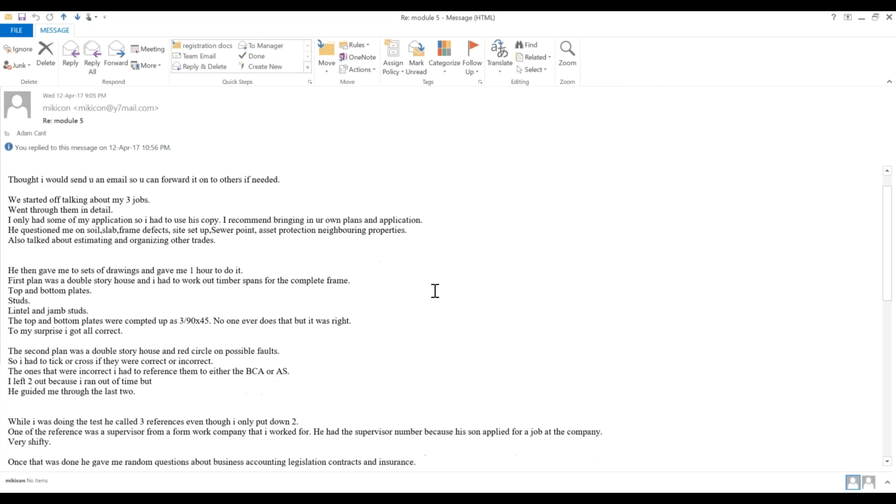And he said the second one, the plan he had was a double-storey house, and there was basically a red circle with possible faults. And then he had to access the building code and the standards to actually say whether they were faults or not.

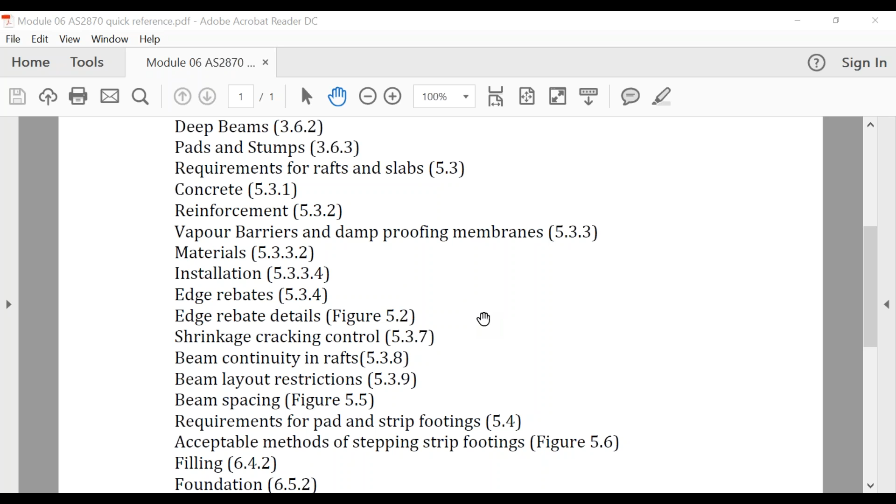And so we'll go through to around, you know, sort of 7:15, 7:30, have a bit of a break. And for those guys who have actually done this before, when we set the activities, what I'll do is just change basically what the soil classification is. So if the original one in your book was, say, a class M, we might then change it to a class P just to try and change it up a little bit for you guys so you can still be involved in it as well.

Let's get rid of that. I'll just make this fractionally smaller. 1 second. All right, so if you've got the same versions as me, which I'm sure you all do, it's on page 17. I've gone way too far. Got to be keen.

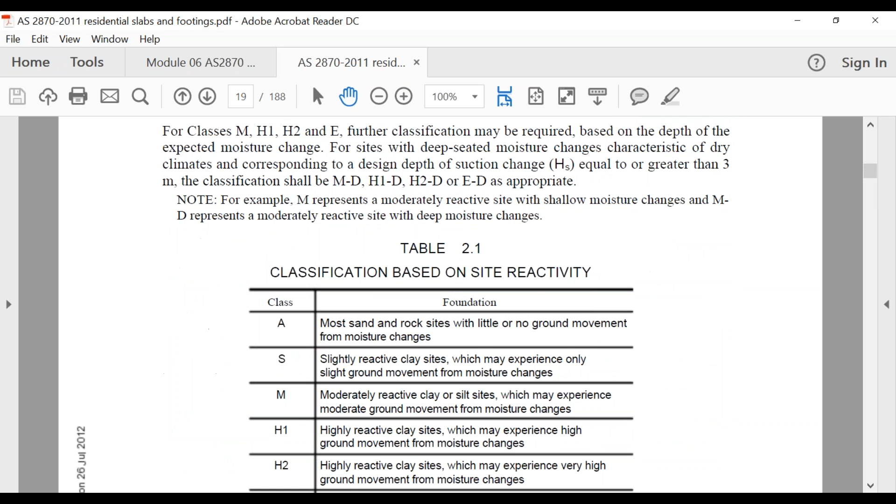All right, so this here, I might shrink that a little bit more. So this here, as you can see, it says site classification based on site reactivity.

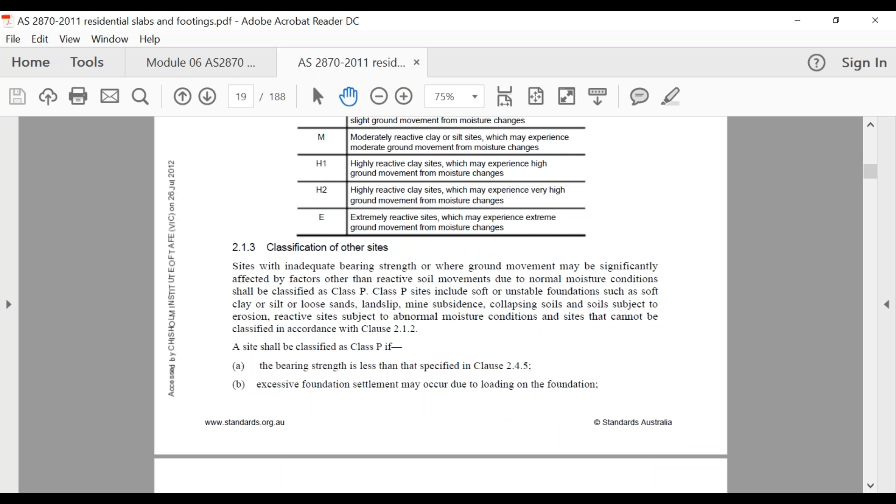So basically, if it's not going to meet those requirements, that's when it's going to become a Class P. So that's just a little bit of background on what our soil classifications are. And now when we do this, guys, it's really tonight's subject.

A lot of the answers you can find in the Building Code of Australia, or you can actually find them in Australian Standard 2870. So it's really up to you, whatever works for you. Me personally, I just use the BCA because I use it for basically all sorts of stuff, and rather than be carrying all these different standards around, I've just found that that's something I used over the years, and I probably didn't own that many Australian standards because they were so bloody expensive. So I just got used to using the Building Code of Australia.

But in saying that, the section in the Building Code of Australia to do with our slabs and footings obviously isn't as comprehensive as the Australian Standard 2870. So the downside is, for me, I go to the Building Code straight away, or you guys might call it the NCC, and I look there first. And then sometimes it doesn't always have it, so then I've got to go and filter through the Australian Standard 2870. So it's really up to you, whichever's going to work for you.

So you might see me tonight referencing basically the building code, and you might go, I actually found that in Australian 2870. It doesn't matter as long as you're finding the answer, because it's going to be the same answer in either. So whatever works for you, and you can navigate through quickly to find your answers, just use whatever is best suiting your needs.

All right, so another thing which I'll just show you, I won't go through it tonight just because of the time restrictions, but I'll email this out as well. What they've done with the online version is given me a few extra training aids that you wouldn't have seen in your classroom. So one second, and I'll just bring this up, and it's just a bit of a definition on all the different footing systems that we use.

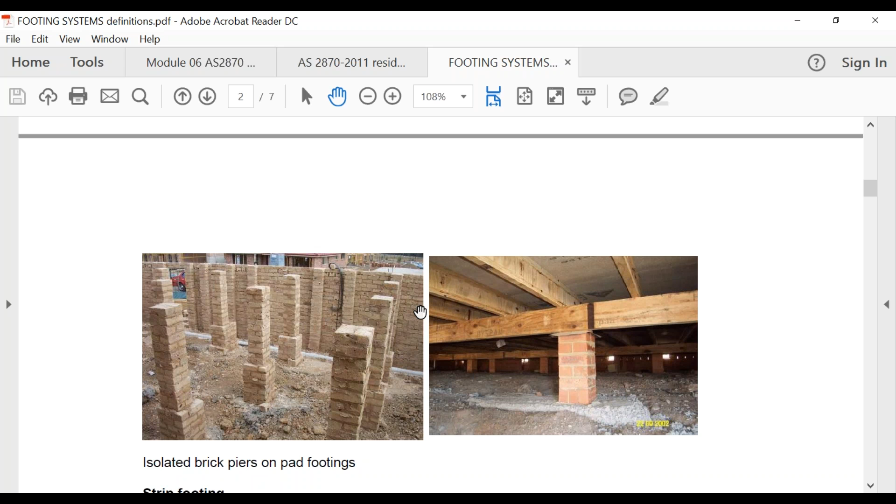And then it goes on to a little bit about our pad footings, and says they're also called blob footings. It talks about when we would actually use those. And then it gives us a picture showing us what isolated piers and our pad footings are. So next week, when we do our subfloors, and we see that we're doing stuff on piers and we're talking about our subfloor ventilation, then this is what we'll be looking at here.

And then it talks a little bit about our strip footing. It's the same thing. It talks to us about what it is and what the process is. So if you've never done a strip footing before, it says we dig the trench with a backhoe or by hand. I'd hate to be digging it by hand, but if you're down the side of a house and you can't get a backhoe in, maybe you do dig it by hand. Then we tie up a reinforcing cage, lay the reinforcing in the trench, and then make sure it's got the adequate cover for our concrete around it.

And then it talks about in there what our cover should be. So if you're not familiar with what cover is, guys, it's the amount of concrete basically surrounding our reinforcing before it either touches the ground or the black plastic membrane that we've got in there.

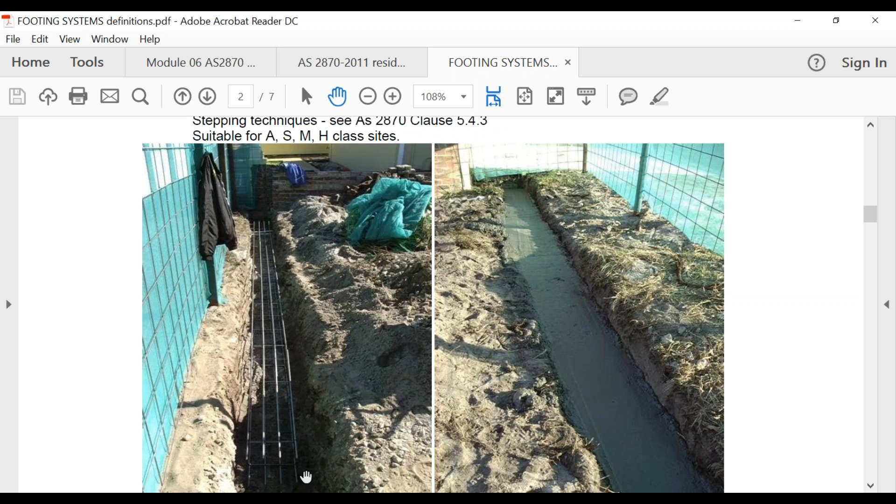So it gives us a couple of pictures. It shows you, yep, they've got what looks like a cage in there. It's not just a layer of trench mesh. They've actually made up a cage with ligatures, I think. Then they've basically poured it afterwards, and as you'll see, they never finish at ground level. It's got to have basically a measurement from ground level down, and we'll cover that tonight when we use our standard. So it does a little bit in there basically on our strip footings.

Then it talks here about our pier and beam construction, and basically shows how that works, and then our pile and beam. And then it talks about our slab on ground. Sorry, it talks about raft slab there as well. Slab on ground, and talks about our footing slabs. And you might find that this terminology might differ slightly to what's in the standards, but by reading it, you'll understand it. And there's our stiffened raft, which we'll be covering a lot tonight. That seems to be pretty big on what they're testing in the VBA at the moment.

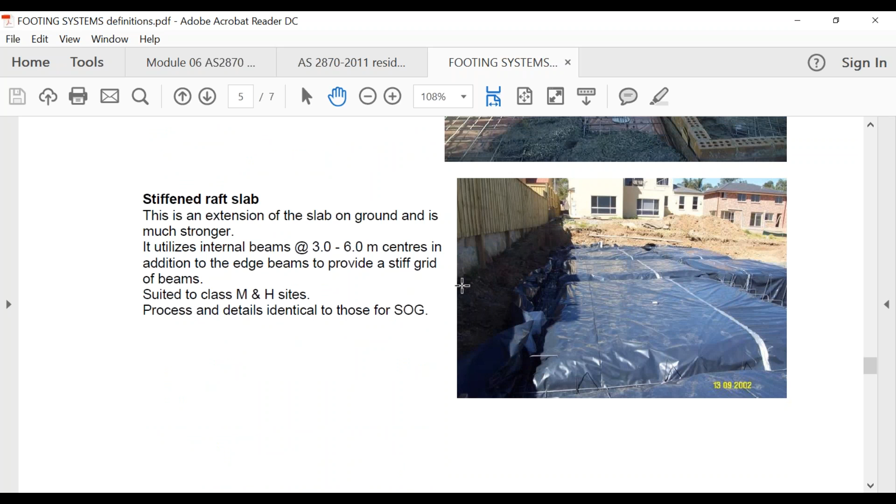And it gives us a little bit of a picture there on how the grid system works on that. And then obviously our waffle raft, and it's showing it there. So what I'll do, guys, I'll email that over to you. You might go, hey, I'm all over slabs. So as I said, anything I send over, if it's not for you, just delete it. But I'm someone who thinks it's better to have too much information than not enough. So I will forward that over. I just thought I'd explain it to you before I send it over.

What's this? I've never seen this before.

All right, so what we might do, guys, just to get us started, is when we look at our Australian standards, the first 3 things that I tab are the page for our stiffened raft, for our waffle raft, and then also for our strip footings, because they're basically the 3 different types of slabs and footings we're going to be questioned on when we go into the VBA. So if you've got your Australian standard there, the stiffened raft starts on page 29.

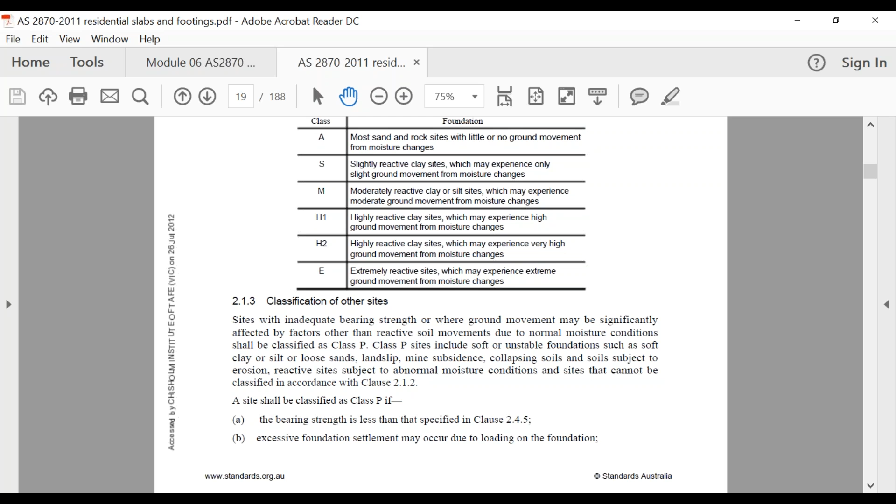So let me come down a bit here. So there's our stiffened raft. That's basically where a stiffened raft starts. So if you haven't actually got a tab on there, I'd chuck one on there as your stiffened raft tab. Then the other one we're going to have is our waffle raft, and it starts on page 33, which is this section here. So if you haven't got one already, just chuck a tab on the side of your book that says waffle rafts.

And you'll see that whenever we go to any of these sections, it'll always give us a bit of a definition, which is highlighted here, and we'll talk about these a little bit more later on. And then it'll give us a table on how we work out what our reinforcing needs to be, what our alternatives are for bars, what the depth of our footing is, and then what mesh we're going to use. So you'll find that they work in their own chapter. So when we go to that last part that said our stiffened raft, it'll give us an explanation, some drawings, then a table. And when we move on to our waffle raft, the same thing again.

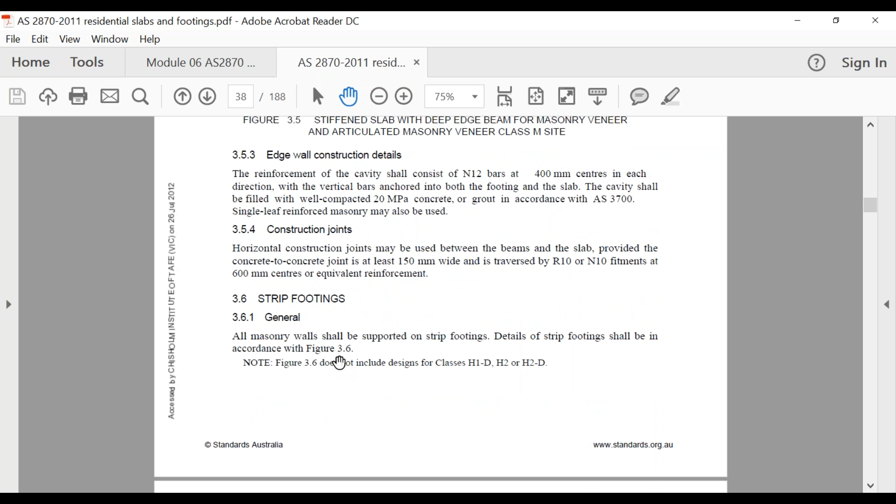And then the next one that we want to put a tab on is our strip footings. So strip footing starts at the bottom of page 36. I'll just scroll down. It's just here. So it basically talks about our strip footings on the bottom of page 36. So if I was you guys, chuck a tab there.

And then once we come over, there'll be some pictures explaining, and we'll cover this stuff a little bit later on. And then we'll come down, there's our spacing of our beams. And then there's our table where we work out with our soil classification and what type of construction we're using, what our depth and width is, and then our reinforcing. And so I would just tab all those ones there to start with.

And from there, what I like to do is just do a little bit on our stiffened raft slab, because that's the one we seem to get tested on the most. We'll do a couple on that tonight, guys. So the first drawing that we want to pull up, bear with me 1 second and I will just bring it up, is this one here. So I'll just get rid of this for you. We'll do this anyway, because it says trainer to give the specific detail.

So what I've done, guys, is actually just made it for a Class S site. So if you guys basically want to work out that drawing there to a Class S with articulated masonry veneer, and we'll say that the slab length is basically 22 meters. So therefore you can then determine what fabric mesh we've got to put in there, and we should hopefully be able to detail that.

So if you go to your Australian standards, we should be able to work out, from the table, what the depth of our footing is. We can draw in where our trench mesh goes, and how thick this has got to be. These two walls, guys, whilst it doesn't show it, are load-bearing walls. So what's the distance from that load-bearing wall to the center of our internal beam, and then our slab thickening, how wide that's got to be, and how deep it's got to be. So fill in that detail.

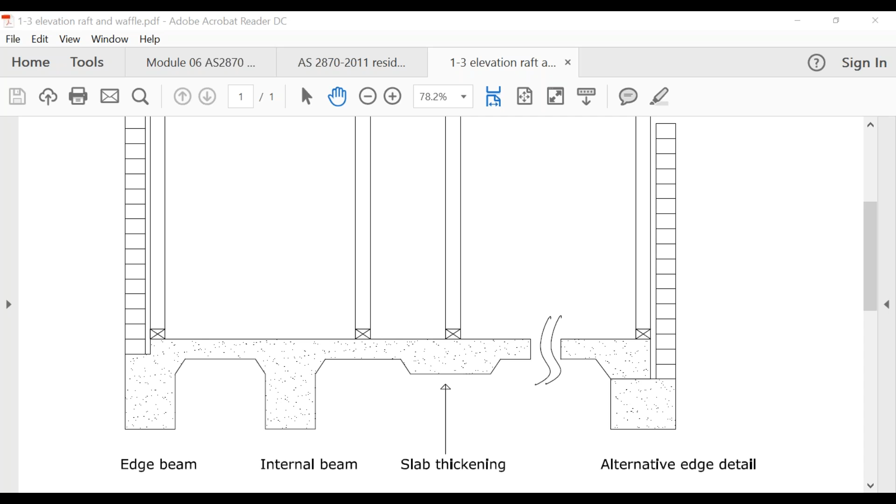So what we're doing, Jeff, is we're just doing this one here on the raft slab, and I've just given the guys a scenario that it's a Class S site. It's got articulated masonry veneer, and the slab length is 22 metres. So from there, we're just going to detail it, give us the depth and the width of our beams, the spacing, and these load-bearing walls, how far that is. So you just detail that as if it was an assessment based on a Class S with articulated masonry veneer.

Give me a second, Greg, and I'll get to that one. I actually got your email today too, Greg, and I just hadn't had a chance. I'll tonight send over some stuff that I've got. I don't know how new it is though, but I'll send it to you. And if you've seen it before, by all means, that's all I've got really. But hopefully it might be new to you.

Yeah, so with that load-bearing wall, it can't be any further than 1 metre away from the internal beam. Yeah, so it's reading the question. So basically if it's any further than 1 metre away, that's when we have the slab thickening underneath it. Or are you asking me, is that the minimum or is it the maximum? Sorry, that's what you're asking me, aren't you? Okay, I'll have a look at the picture.

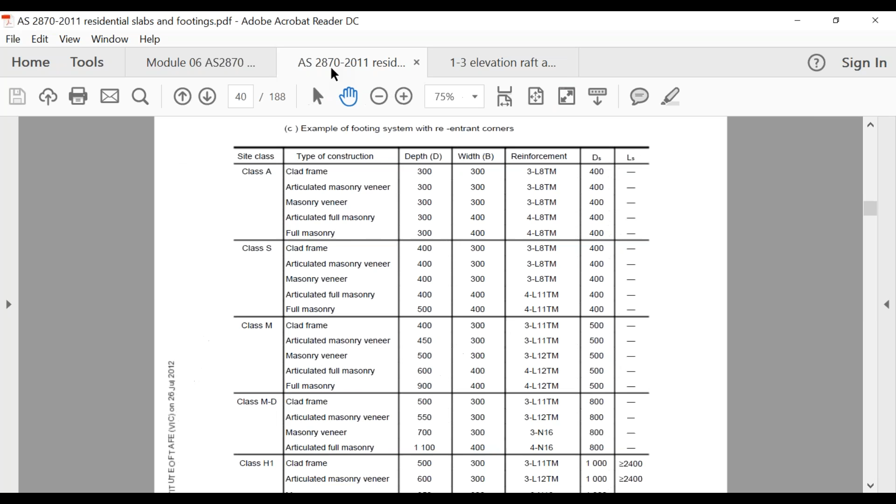So what we should be doing, guys, I might just bring up the standard, just so if anyone is struggling, because there might be some guys doing this for the first time. So let me get up to the page that it's on. Just give me a second. Okay. All right, so as we can see here, this is a drawing that we want to be getting out of our Australian standard.

If you're wondering how we got here, basically what we should be doing is going to the stiffened raft section of our Australian standard, which starts here in section 3.2. When we come down, there's some things that just don't change. So there's basically the width of our footing here, that angle on there, and that's something you'll probably see in a multiple choice, and it says what is the maximum or minimum, I forget how they word it.

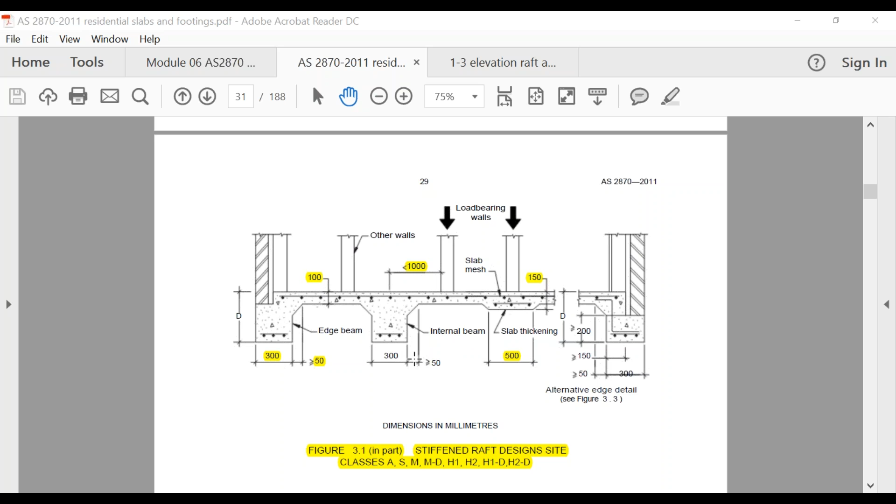I got the trench mesh there as 3L11TM. So let's have a look. I've been known to make mistakes, especially when I make up something off the cuff. So what we said it was going to be, on its articulated masonry, I said, didn't I? So that would make it that one there, wouldn't it? So the 3L8 TM. Does that sound right? I did say articulated on a class S, didn't I? Yep, cool. So there you go. That's right. All right, cool. So everyone's going, I got that wrong, but actually I got it right.

So there we go. All right, so what we'll do from that one there, guys, is we'll do another one. I like to sort of keep these, we'll do all stiffened rafts, then we'll do waffle pods, and then we'll do strip footings. And then at the end, we'll go through basically the questions. So whilst we've just done a little bit there on our stiffened raft slab, what I'd like to do then is basically I'll bring up this other document. So just bear with me 1 second.

All right, so this one here, some of you guys, if you've done this course before, you would have already done this one, but I've actually done this up as another exercise as well, but I'll just talk through it basically to start off with. And so we're going to do this on a Class M articulated masonry veneer. And so what we need to do is draw in our reentrant bars. So guys, if you're not sure what reentrant bars are, basically at our internal corners, I don't know if you guys can see my mouse, but you can see the internal corner here. Basically we have to put a reentrant bar in there.

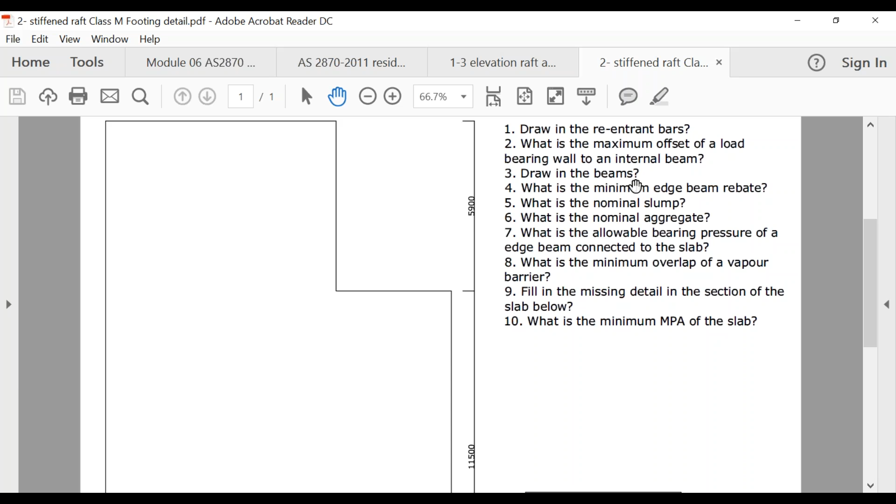We can either find that in our Australian standard or in our building code, and basically it tells us what size that needs to be. So let's draw in where it goes and then also nominate what the size needs to be. And then looking at our last drawing, this is what is the maximum offset of a load-bearing wall to an internal beam. So we can write that in there. And then we're going to draw in what our beams are. So with our beams, guys, basically when we reference our table, it's going to tell us what our spacing of our beams should be.

And so it is actually in our Australian standard, and we'll do a little bit more when we talk about our continuity of beams and so on. But I just use this lesson, I suppose, where I don't want you to feel like if you're doing it for the first time that you're totally left and you're lost. If you're lost, I'll put you in the right direction. But I think it's a good way to start, rather than me putting everything on the screen, to point you to the direction and say, this is all going to be in our stiffened raft, and you read through those, and there might be a reference where it'll point you to the back of the book under a certain clause to talk about continuity of beams and things like that.

So if we look in our stiffened raft section of our standard, we should find a lot of this. The generic stuff, basically around what is a nominal slump of concrete, the nominal aggregate, that will be in our standard and also in our building code. So it won't necessarily be under the stiffened raft because that is generic to all our slabs and footings. And then the same with our bearing pressure and our vapor barrier.

So let's just have a bit of a crack at it. And as I said, if it is your first time doing it and you're totally stuck, just say, hey Adam, can you give me a hand with this? And I'll put it on the screen and show you how we get there. But basically, the starting point for the reentrant bars, yeah, that'll come under your reinforcing.

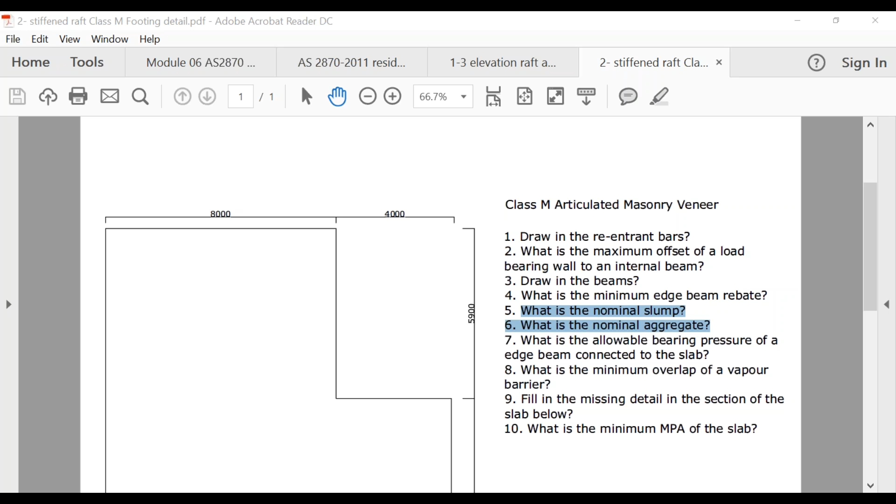And when you do it, guys, don't forget to do the little sectional down here as well. You can draw that in with your trench mesh, basically how deep it is. Maybe put in your membrane, how much cover needs to be on there with your mesh.

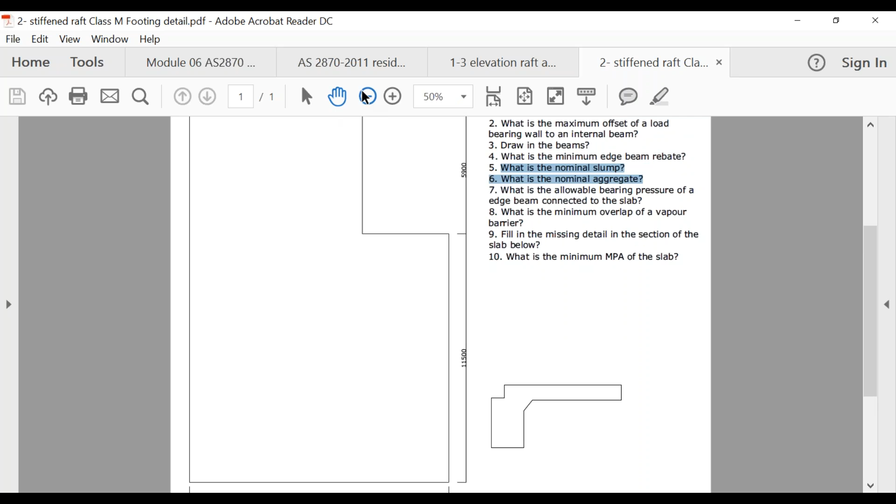Make that a little bit smaller. Oh, it's way too small, isn't it? Cool.

Okay, that's all right, Valavan. I might start taking you through it now while the other guys are working through it, and I can basically start to take you through how we actually did this, if you like. Are you happy with that? Yep, and don't feel bad about this not being your strong point, because to be honest with you, I would dare say that probably not many of the guys in here, this is their strong point.

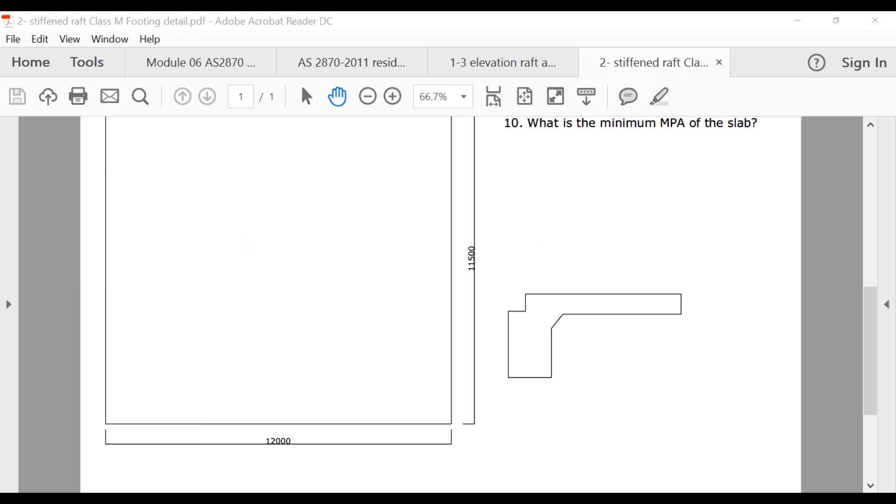So back to here, the first question we've got says draw in the reentrant bars. One second, I'll just pull open my building code, and then I can show you what we're looking at. So on the building code here, it says draw in the reentrant bars. Now this will be in your Australian standard as well. I said I'm just used to using my building code.

But if I come down to page 142, let's make this fractionally bigger so we can all see it. So this here is giving us our stiffened raft as well. So you can see that it's got pretty much the same table in our building code. So let me come back up.

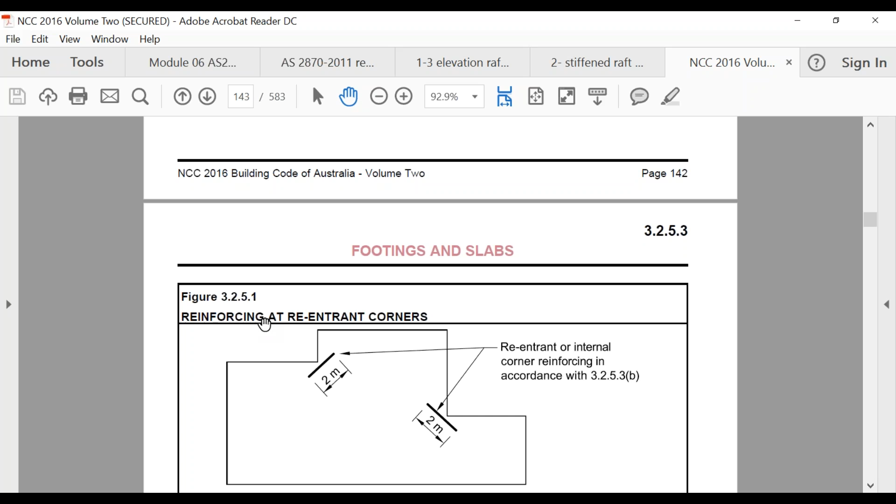So this here is talking, which section I'm going to of the building code, basically it's in our footings and slabs part. And when we come down, there's a picture here that says reinforcing at reentrant corners. So that's what we're getting at there. You see how there's internal corners. We have to put reinforcing on those corners, and that's called a reentrant corner.

So it tells us that basically it has to be 2 meters long, and it says it has to be in accordance with 3.2.5.3. So if we go back up, 5.3, this is where it'll talk about it. So at a reentrant or internal corner, 2 strips, a minimum of 2 meter length of 3 L8 trench mesh, or 1 strip of 3 L11 trench mesh, must be placed diagonally across the corner.

So that tells us what type of bar. So it's got to be 2 meters long, and if we use basically the three bars at 11 millimeters thick in the trench mesh, that's what we're going to place across those reentrant corners.

So that's basically, one sec, I'll just bring up the picture again. Oh, 1 second, mate, it's just died. I'm going to have to bring that one back up.

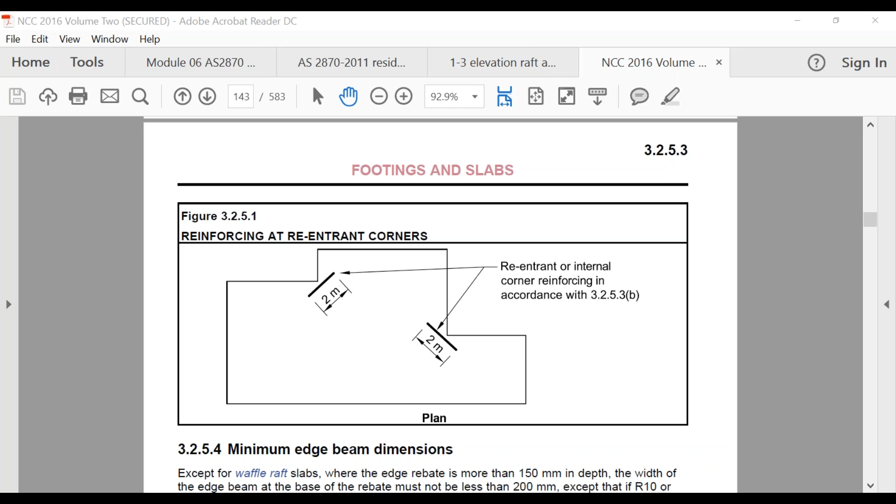So that is the first answer for the reentrant bars. So then the next question says, what is the maximum offset of a load-bearing wall to an internal beam? So is it? Yeah, it is, mate. It's always 2 meters. It can be longer, but remember, this is always going to be the minimum. So if you had a bit lying around and it was 2.5 meters, you probably wouldn't bother cutting it off. Just save your time. You just chuck it in and you tie it off.

So just remember, everything we're doing with the standards is always going to be the minimum, and we'll see that more in the coming weeks when we start designing wall frames and so on. And you'll look at it and go, geez, I wouldn't use a timber that small, and it's because this is a minimum, and we always go that little bit extra.

So if you had a bit that was longer than 2 meters, you just put that in, unless you could cut it in half and use it somewhere else. But if it's only got a few hundred mil that can't be used anywhere else, you would throw it in there anyway.

Sorry, 1 second, I've got a question there from Ben. Yeah, so if you want to maybe just wait on that one, Ben, when I get to explaining that one to Valavan, I'll cover that one when I get there. So if you just leave that one, I'll go through those as we get down there.

So I'll go back to the Australian standard. Bear with me just a minute. When it was talking here about our beams, and it said to go to sections 5.3.8 and 5.3.9, it starts to talk about how our beams have got to be continuous all the way through. So we'll have a read on that section. 5.3.8, I'll just find the page. So it's on page 50.

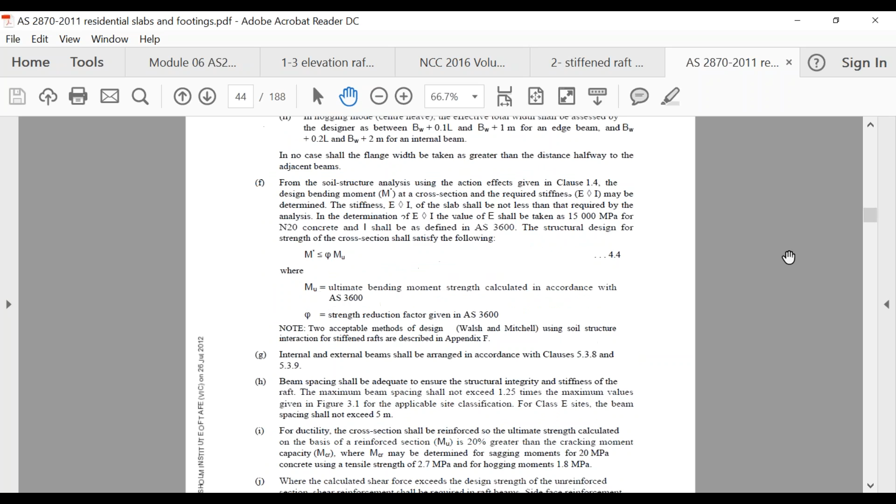Okay, bear with me one second, Ben. You might be right. I might have been going off my other plan. I've got about three different plans here to help the guys with. I've probably just gone to the wrong page, because I was looking at the wrong soil classification. So I'll just keep going with this part here. Oh, what's going on? My standards are missing a few pages. Nearly there.

Right, so beam continuity in rafts. Where the raft design includes internal beams, which ours does, the structural continuity of internal and external beams in stiffened rafts, including our waffle rafts, shall be maintained with the following criteria. Internal beams shall be continuous from edge to edge, so they've got to go from side to side. Where beams are at different levels, as may occur in a two-pour system, we don't have to worry about that, but they've got to be continuous because we're not doing a two-pour system with this.

And where one side of the re-entrant corner is less, yeah, so don't worry about that one, that doesn't apply to this one here either, but it talks about, you know, if it's less than 1.5 meters and so on. So what we got out of reading that was that when we put our beams, they've basically got to go all the way through like this.

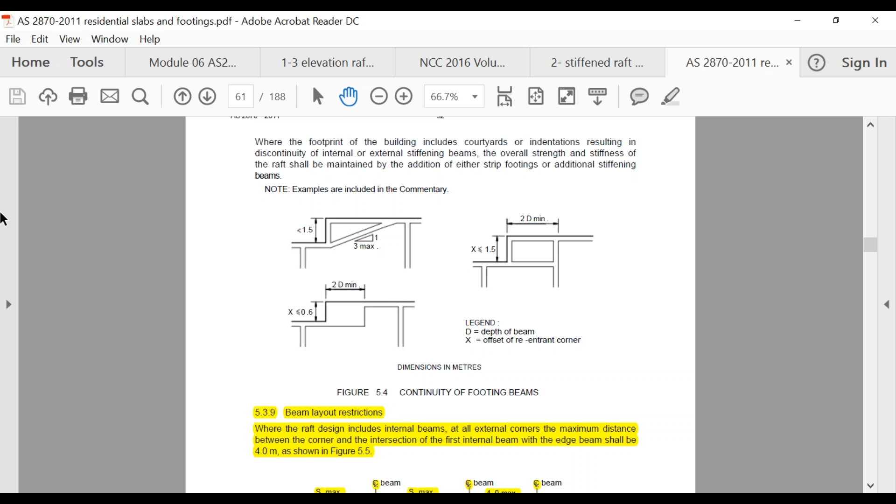So bear with me a second, and I'll go back to basically our question. Sorry guys, just got that many tabs opened up here at the moment, trying to have all these things done.

Yeah, sorry, and one other thing too, this is what Ben just brought up, with those internal beams, when you see on here, it talks about the beam layout restrictions. So when I covered the raft slabs earlier on, and it said your beam set out as per clause 5.3.8 and 5.3.9, you'll see here that the first one in, it says where the raft design includes internal beams at all external corners, the maximum distance between the corner and the intersection of the first beam with the edge beam shall be 4 meters.

So as you can see here, the first one in is always going to be 4 meters, and then that table that I showed you before, where it had our beam spacing at 6 meters, from then on becomes 6 meters. So the first one here is always going to be no further than 4 meters in both directions. Can you see that there? It's got 4 meters that way, then 4 meters this way. So that's why our first one's always 4 meters, and then after that we can make it up to whatever that table has. And I'm pretty sure that on the one we looked at it was 6 meters.

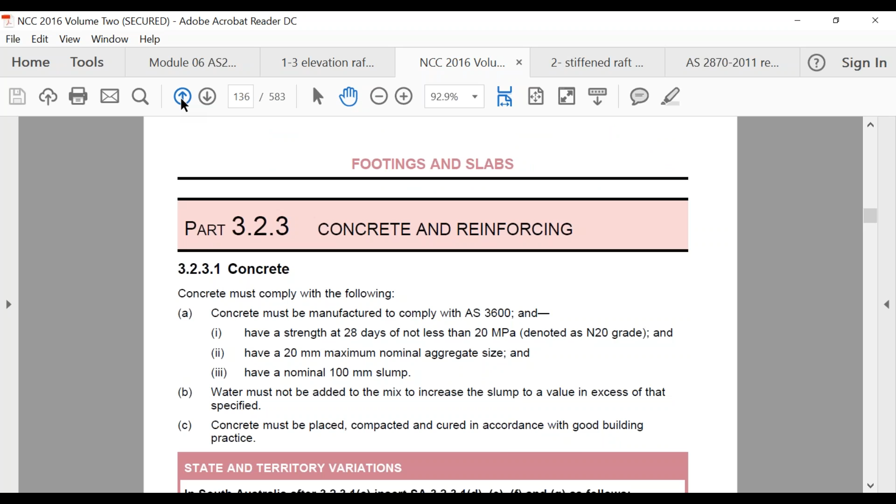I hate using a soft copy. Here we go. So this talks about our edge rebate. So for you guys too, I presume you're listening in if you're still doing your drawing. So the minimum edge rebate, if you haven't got this one, guys, basically the edge rebate must not be less than 20 millimeters, except as provided for in D.

So when you look at D, basically they're not required for single leaf masonry. Normally the question I get asked there is basically 15 millimeters. And another one which we quite often get in our multiple choice is how much can the brick actually overhang the edge of the slab, and that's 15 millimeters. Not something that's asked in that question we were just doing, but definitely worth highlighting and tabbing for your multiple choice. I've just got that called my edge rebates. That's what I've got the tab on my book.

All right, so we'll go through this next one. This is the same thing, can be out of the building code or out of your standard. So it says, what is a nominal slump? I'll cover a little bit later, guys, if you don't know what slump is. If you can hang around, I've got a video on it that I can show you at the end if you're not sure how they actually do slump. But I won't do that now because probably a lot of you guys do slump tests already anyway. So what is a nominal slump of concrete?

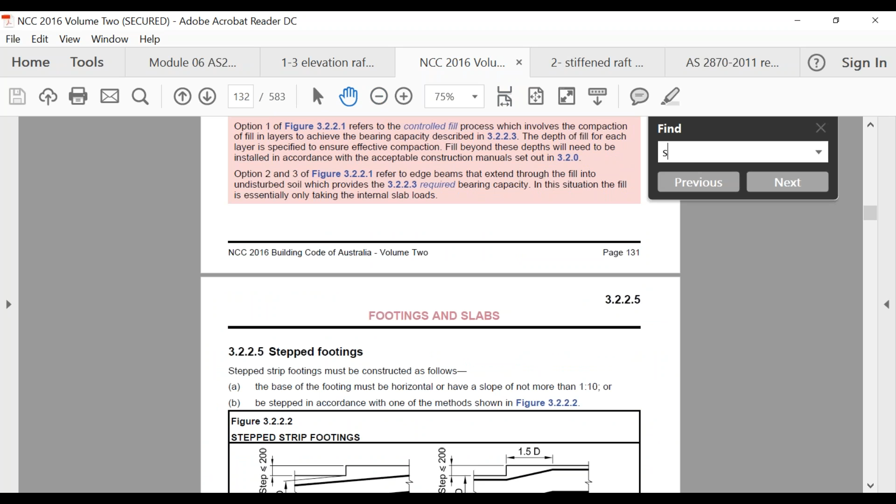So I go to my building code for that, and just let me find it. I'm just going to shrink this a bit. Actually, what I'll do to cheat and get there quicker: if you're doing a soft copy, guys, if you go Control F, you'll see this pop down, and that's in any PDF. I'm just going to put slump in there. Save me scrolling through and making you guys all giddy. And it'll show me where slump is in the building code. So there it is, section 3.2.3.

And this is where it talks about the next couple of questions we're going to be asked. So the minimum nominal slump is 100 millimeters. The minimum MPa is 20 MPa. And the maximum nominal aggregate is 20 millimeters. So that's where you can find it, in concrete and reinforcing. A lot of you guys doing your multiple choice might know these off the top of your head anyway. But if you don't, it's worth chucking a tab in your building code and highlighting those, because that's something you'll more than likely get in a multiple choice as well.

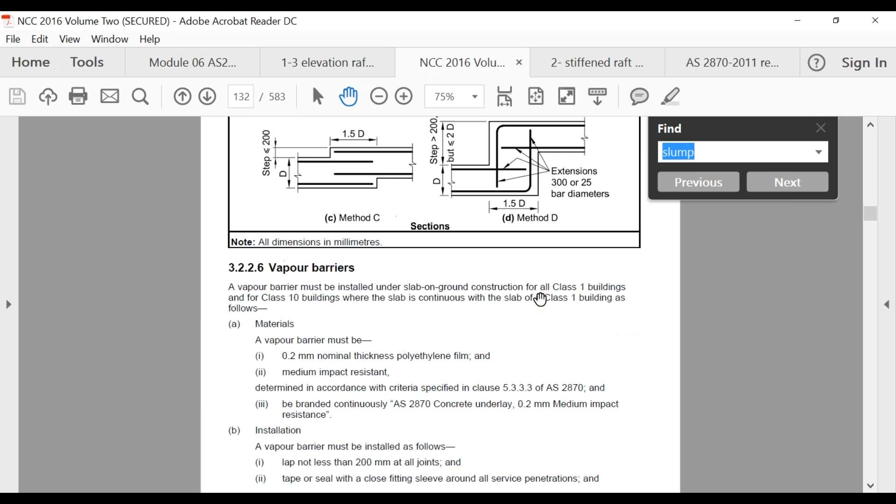So that one covers our nominal slump and the aggregate. Next one's a little bit trickier, and it talks about what is the allowable bearing pressure of an edge beam connected to the slab. Same thing again, this is going to be in your building code and in your Australian standards. I've got it marked in my Australian standards because this section is a little bit smaller, I find them easier to find. I've got it marked here on page 130. I'll show you something that I would highlight and tab. Bear with me a second.

The worst part is because I'm using the soft copy, I haven't got all my highlighted parts on it. But you can see here, foundations for footings and slabs. If you're wondering, hey Adam, how did you find that? The section we're going to says preparation under excavation for footings, then it scrolls on and starts to talk about foundations for footings and slabs. This is where it tells us our different kPa. Slab panels, load support panels and internal beams must have a bearing pressure of not less than 50 kPa. Edge beams connected to the slab, not less than 50 kPa.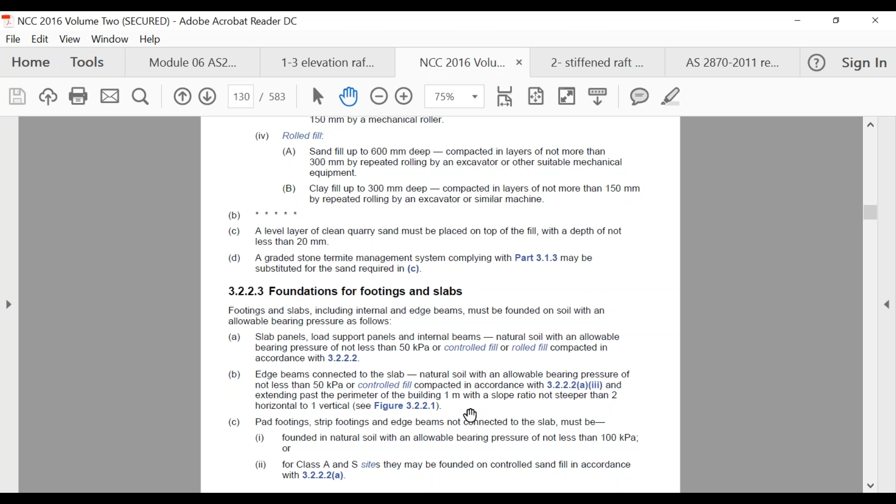And there's another one here where it talks about 100 kPa. Pad footings, strip footings and edge beams not connected to the slab must be on natural soil of not less than 100 kPa. So there's a couple of your measurements in kPa if you wanted to highlight those. And that was the answer for number 7. The actual answer was 50 kPa, the first one I showed you: what is the allowable bearing pressure of an edge beam connected to the slab?

And then these next ones, what is the minimum overlap of vapor barrier? So the vapor barrier, guys, is obviously our black plastic, and it's going to be in the same section of our building code here. So I scroll down a little bit. It'll also be in your Australian standard, but you can see here's a section, still in our preparation part, talking about vapor barriers, and it talks about how thick it has to be.

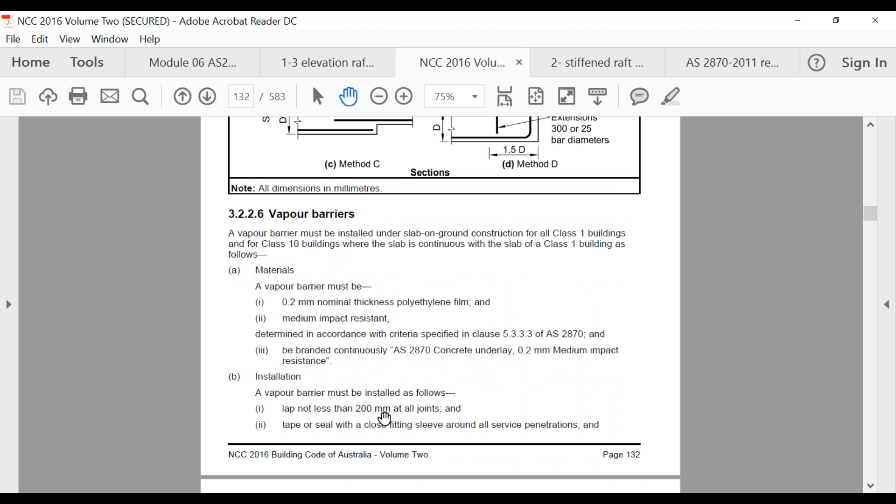So it's got to be 0.2 millimeters thick, medium impact resistance, so obviously we're not piercing it when we're walking on it and there's rocks underneath it. And then it talks about the installation, and it states that it has to be lapped no less than 200 millimeters at all the joints, and then also goes on to talk about, not that it's part of this question, but just for your own knowledge, how we actually have to manage that vapor barrier around our penetrations.

So it's got to be taped or sealed with a close fitting sleeve around all service penetrations, and then fully sealed where punctured, unless for service penetrations, with additional polyethylene film and tape. And you can read more on that, but the main thing that you guys are going to be asked in your multiple choice is the 200mm lap on that black plastic. So nearly through these questions.

Basically, we did cover there what is the minimum MPa of a slab, and we found that was 20 MPa. So MPa, guys, stands for megapascal, and that's how they actually test the strength of your concrete. If you're working commercial, you might have seen it. They do a cylinder test where they take the concrete away in this big cylinder, probably a bit bigger than a Coke can, and then actually crush it.

If you're interested in this stuff too, guys, I've got videos on it from other training courses I do. Most people don't really care. They just want to know that it's got to be 20 MPa. But they take it away, and concrete keeps getting harder the longer it goes. There's some charts in this video I've got that show you, even in a couple of years' time, how it still increases in strength. They crush it and make sure it's at the strength it should be at the time of the crushing. And then the last part here was fill in the missing detail of the section below.

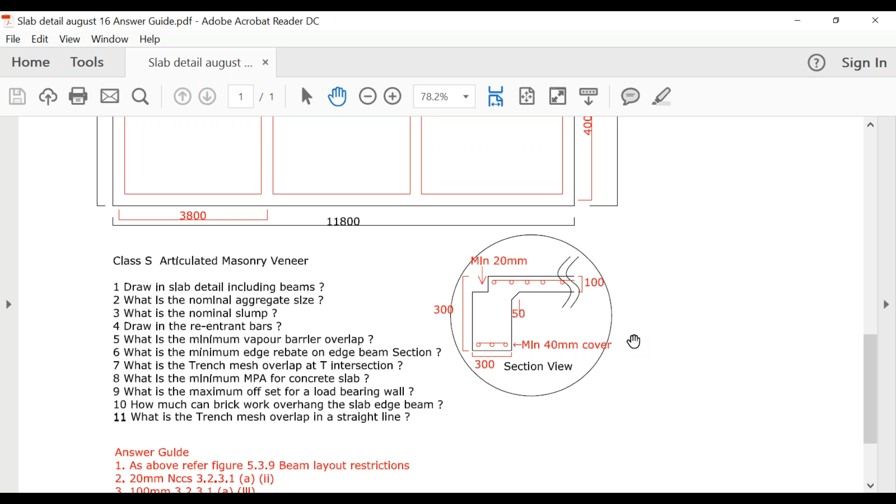Yeah, cool. So basically our cover, and then that transition in there was basically 50mm. That's what you really want to be drawing in there, something that looks like that, and obviously suits your scenario. So as I said, I might just cover off that continuity of beams again. Now, unfortunately, this is only the CAD drawing that I've got.

But when we go to our Australian standards, and this is something that you definitely want to tab within your Australian standard, are these two sections here where it talks about the continuity of the beams, and then when it gets down to here about the beam layouts. So that's when it's showing us that the first one is always 4 meters, and then once we come back to our table, I've just gone a bit too far.

Yeah, on the one I've got, you're right, Wayne. On the one that I've got there, on the depth for the Class M on a raft slab, for that scenario that I put up, or that's actually in your hard copy in your folder, it should be 400mm deep. You are right there.

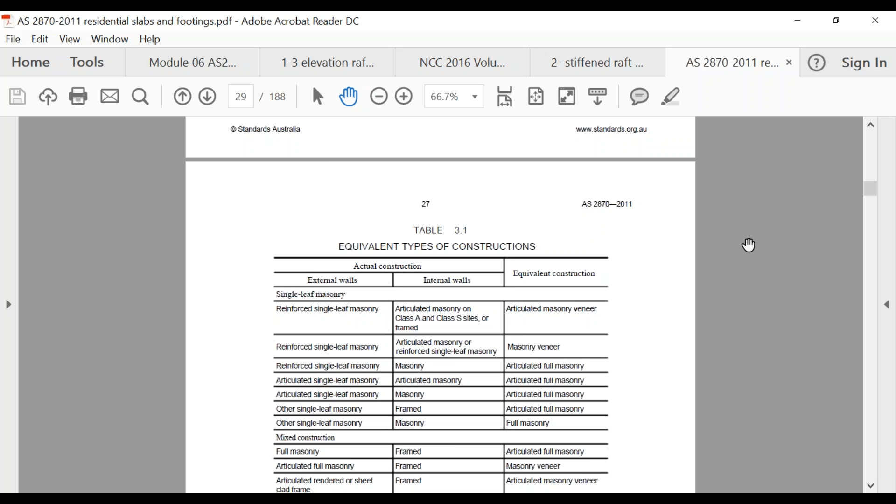So just let me get to basically this raft slab, stiffened raft. So when we work out those beams, this is what we're doing. The first one's always going to be basically our 4 meters, and then you can see here that as the soil gets worse, when we start getting into our highly reactives, the beams start getting a lot closer. Whereas up here, when we're doing something on a Class M with a clad frame, so it's not very heavy, those beams can start to be at 6 meters.

So that's going to tell us that the first one's always going to be that 4 meter, and from there we can start to space them out to what's in there. Now, one thing, this will pop up a little later when we do some questions, is this part here, and this is what I find frustrating about the standards, and probably you guys too, because we look at that table and it says your maximum beam spacing is 4 meters, 6 meters, or 5 meters, wherever it's going to be.

But then we read this: where the number of beams in a particular direction satisfies the requirements of the maximum spacing given in figure 3.1, so that's that figure down here, individual beams may be varied provided the spacing between any two beams does not exceed the spacing given by more than 25%. So there is actually a little bit of play there for us. If I was doing it in the VBA and they get me to draw it, I would just draw it as per the table.

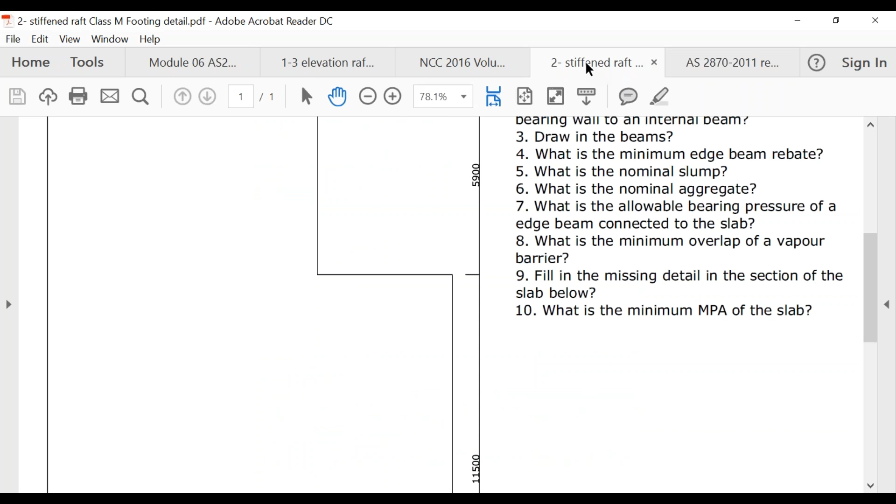So hopefully this is not getting too jagged for you guys, with some guys having done it before and some of you not. With not being able to see what you're doing to give you direct feedback, I thought that might be the easiest way to explain that to the guys who are doing it for the first time.

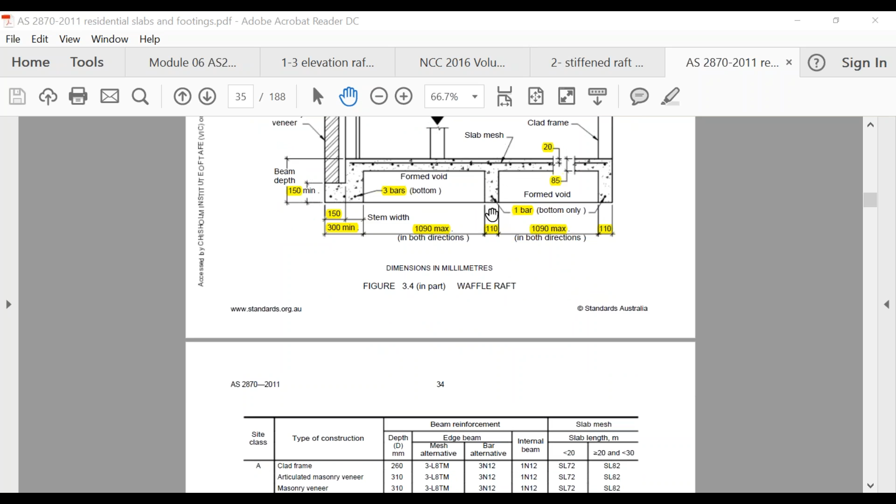So we go down to here, H1, didn't we? Yep, so what I said, I said masonry veneer, didn't I? Yep, so 2. And so therefore our depth should have been 460. So when we come up to here, basically our beam depth 460, and I suppose we'd better figure out what our bar was as well for the internal beam.

It would have been 1N16. And I think that's probably all we needed to work out off the table. Oh, then our mesh as well, because it was less than 20 metres, would have been SL82. So hopefully that's covered all the little parts, and then the other ones were just our generic of what we would have got off there.

So yeah, it's very similar to basically the other raft slab we were doing, where basically we just use the table, and we're doing this now for our strip footing as well. So we'll move on to our strip footing. And from there, guys, once we've done this, we'll then go on to those questions.

So the guys who have done those 35 questions, I'll see if I've got any other ones I can throw your way, and if not, I'll get someone on CAD to draw some up and I'll email them out.

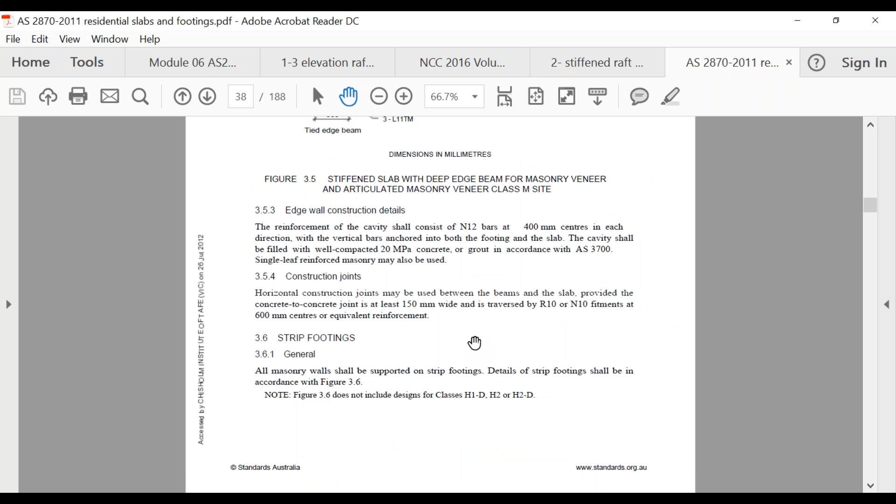But let's just have a look at our strip footings. So I'll go to our Australian Standard, and that's not the Australian Standard. We'll come down here and we'll go to our strip footings. So strip footing. So the bottom of page number is 36.

Yep, I'll send that over to Ben, no worries at all.

So this one starts to talk about our strip footings. It just says here, note that figure 3.6 does not include designs for H1D, H2 or H2D. So with our strip footings, around the outside of the building, there's a better picture of it down here. When that strip footing goes all the way around the perimeter of our building, normally we would have something that looks like this.

We've got basically our masonry, and me personally, I haven't done anything like this for years, but I know the houses I lived in when I was in Brisbane were all like this. And so basically we've got our engaged pier here with our bearer on top of it, and then just our masonry going up the side.

And because that's going to have that masonry on it, depending on what type of frame and cladding we've got, because sometimes we're going to have a clad frame, that's what we'll look at in our table down here. We have clad frame, we can have articulated masonry, we can have full masonry where it's double brickwork all the way up. That's going to determine what our footing is going to be.

And then, as quite often happens, because that's there to support the external skin of the building, these internal strip footings, you can have stumps and piers basically in them. And what I want us to be aware of is, a lot of guys get tripped up in this exercise because they don't understand that there's a difference between the DF, the D, and the DS.

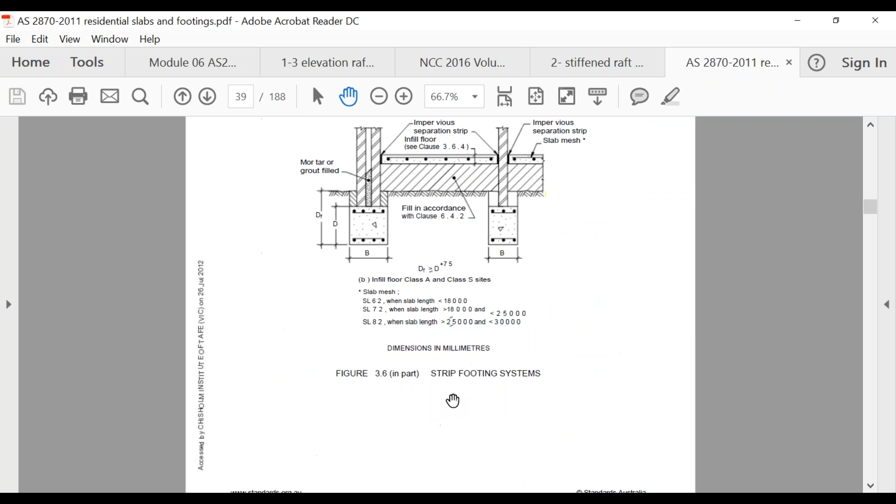So here, guys, the DF, if you don't know what these symbols mean, you go, well, shit, what does DF mean? Because when we come to our table, we've got stuff in here that says DS, LS, D and B, and if you're wondering what these actually are, we go back to the beginning of our standards, just let me come back.

So if you're ever unsure, you always go to the front, and it will give us the glossary section where it talks about definitions. You can see definitions start here. It tells us what articulated masonry is, articulated full masonry, what articulated masonry veneer is, and what articulation is. So if you're not too sure what the definitions are, you just come to here. So if you go, geez, what's a bored pier?

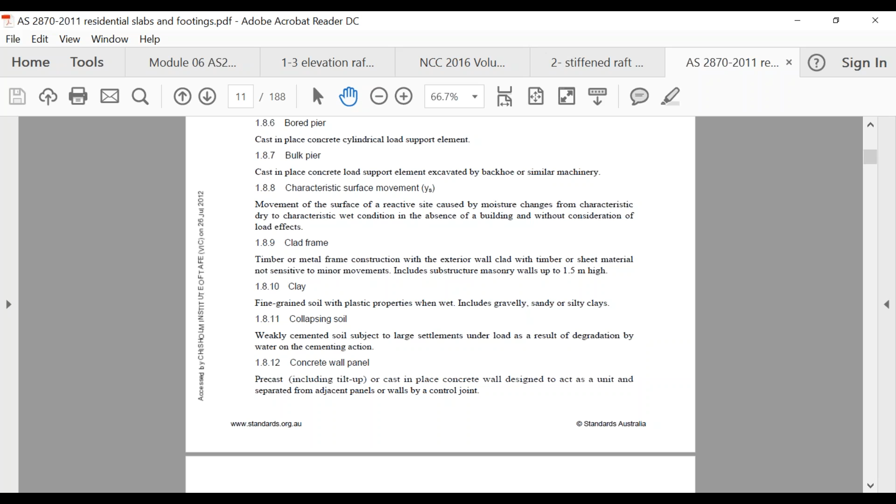What's a clad frame? So if you're not familiar with this, go to the definitions, and it's in alphabetical order. But where guys get a little bit stuck when they're using these tables and they're trying to find definitions, like that one that says DS, when you go, geez, what's DS? You'll come to DS, and you can see that it's not here. So you've actually got to scroll a little bit further, and you'll find that basically it's under S for symbol. So when we get to symbols, oh, I've gone past it.

Sorry, under the notation, and then it says the symbol and the definition. So it's not under S, sorry, it's under notation, and then it says here the symbols and where they all are, and then what the definition is. So if you're not too sure what those little ones are, like the DF, it's the depth of the strip footing from the finished ground surface level.

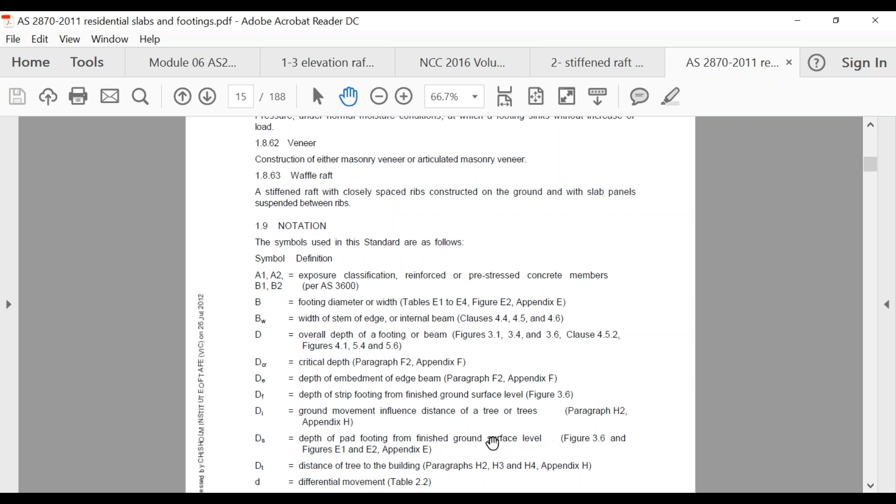And then the other one, the DS, where people get confused, is the depth of the pad footing from the finished ground level surface. So that's the depth of the pad footing as opposed to the depth of our external beam that goes all the way around. So when I come back down here, that'll make a little bit more sense now when we look at it. Bear with me one second while I get the page.

So DS is the depth of our pad footing, whereas DF is the depth of our footing, which is the whole thing there. And you'll see there that basically the footing doesn't go all the way to the top. So when we look at this little part here, if I can highlight it, no, it's not going to let me. It says basically the DF is the D plus 75 mil. So we're going to have 75 mil from where our concrete finishes to basically our ground level surface. So just be aware of that.

It's funny, one of the guys I trained a little while ago, he was a brickie, and he used to come and do a bit of stuff on strip footings and never knew that it had to actually be 75 mil below. And when he did the course, he was like, oh, I didn't realise it had to be there. He said, I was always cursing the bloody concreters because it was always a pain in the bum, because it would always get dirt and stuff kicked in on it. He'd have to come and clean it all out before he could lay his course of bricks on it. He used to think, geez, why don't they just make it to ground level and that wouldn't have to happen? So it does actually have to be below the ground surface as is there.

So yeah, it's just really about getting familiar with our standard, knowing where to find the definitions we're not sure of, and knowing where to find those symbols, because some of those do get a bit tricky when we're looking at DF and DS and so on.

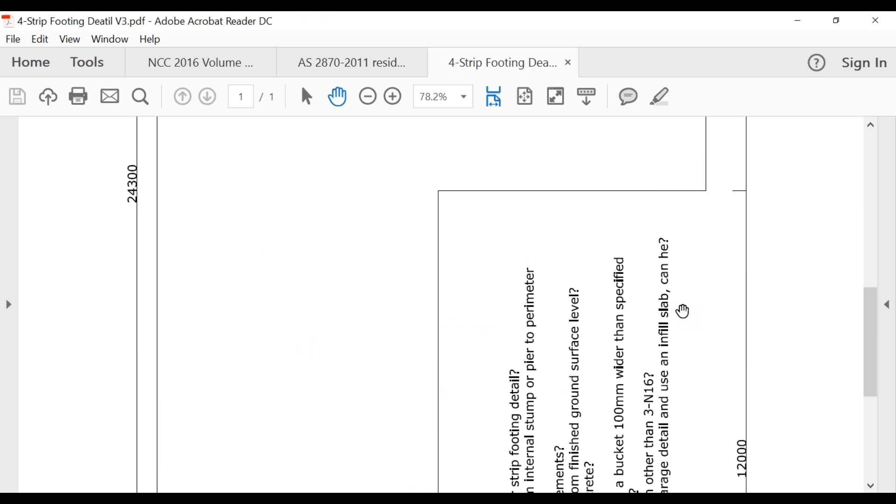So what we're going to do is, I'll pull up this, one second, I'm just going to close a couple of these because there are so many open, it's getting a bit confusing on my end. So bear with me a second. We don't want the stiffened raft, we've just done that. We're going to do the strip footing one, so bear with me a second and I'll just bring up the strip footing. So this one here is the one we're going to do now. I'll just spin this around so it's in the right orientation for you.

So for you guys who have done this before, we might even just do a rough hand sketch. We'll do the same dimensions, but we'll do it on a different soil classification. I'll just see if I've got one here that I've done previously on a different soil classification, to try and make it a bit more interesting for you guys. No, I don't, but the one we've got there is on an H1, so we'll do something a little bit different, and I'll work out the answers with you while the other guys are doing theirs. So let's just see what's going to work.

So why don't we do a class M, and we'll do it as masonry veneer. So do a masonry veneer on a class M, and that way you guys can basically work out what they've got to be and basically draw it in, and we'll see how it looks. So hopefully I can catch up to you while I explain to these other guys. I might just write that down because I'm likely to forget what I told you. So class M, masonry veneer.

All right, cool. So back to the guys who are doing this for the first time. So when we go through these questions, it says, what is the beam requirements for the strip footing detail? Some people determine this a bit differently, but when it says the beam requirements, just tell me actually what the depth and the width that's got to be. And then the distance from the internal stump or pier to the perimeter stump or wall. So you'll have to go to that table and find out what the definitions are to access that one.

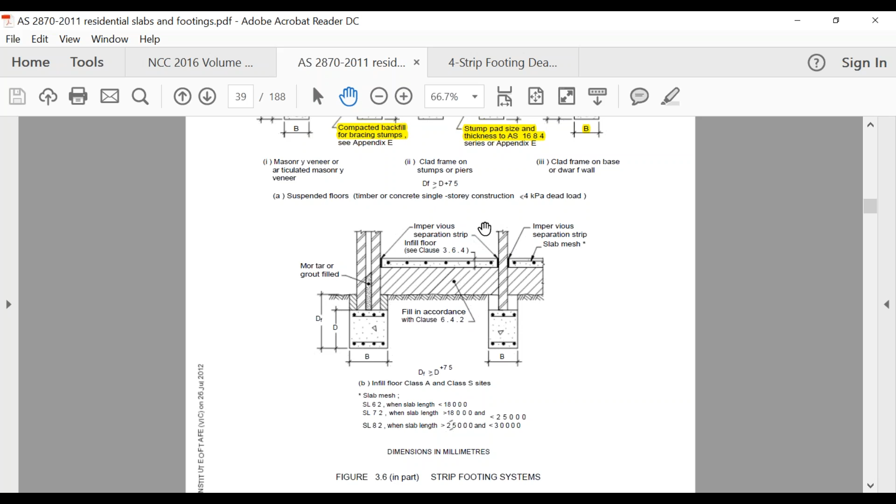So I'll give you 5 minutes, and if you are stuck and you want guidance, just let me know. But if you go to this part here, starting from strip footings, you should find most of those answers other than the MPa, which we've already covered, from page number 36 to probably about 39. So have a crack, and if you get stuck, just let me know. Yeah, so if you are wondering what a strip footing looks like from above, that's what it looks like there.

I'm just going to chuck it on mute again for a second, guys. Yep, no worries, Wayne. I'll check it up now. That one? Yeah, no worries, Valavan. I'll send those over for sure.

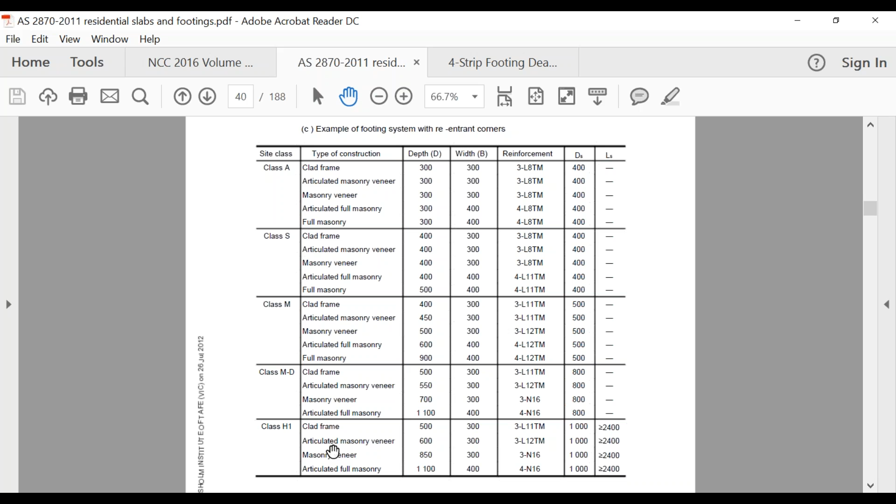So you can see it's only applicable to the H1s, it's not for these other soil classifications. So that was really just an exercise to get you guys, because you probably didn't know what LS was, to actually go and have a look at the notations, find the symbol and go, yep, it's 2400. So the answer for that one was 2400. So then what are the reinforcement requirements? So look down here, basically H1 masonry veneer, it tells us that it is

3N16 bars. And so what you'll find too, guys, if you haven't done strip footings before, whenever we see them drawn in, they've always got a top and a bottom. So just make sure you do that. And on this, it's obviously got the bars. So some guys, if you're not familiar with it, I was just Googling this before to try and give you guys a visual on it. So depending on how you do your stuff, sorry, I'm just trying to bring this over.

This is what I would call a cage, and you can see that there. These parts going around it are ligatures, and that's basically what holds it all together. So they're basically a square, and depending on how many bars you've got, if it's only 2 bars, you put 1 in each corner, and you tie that off, and you can actually just drop it into your strip footing. I've never had them welded, but when we were in Queensland, I'm sure it's done here in Melbourne as well, you could get it welded, delivered and just dropped in. You didn't have to actually make that up on site.

So yeah, we always used to just tie ours. So if you did have your top and bottom you want to tie together with your ligatures, that's basically how it's going to look, something like that. All right, so back to the questions. Oops, wrong one. So then we just worked out our reinforcing requirements. Oh sorry, I forgot to tell you guys the answers for who were doing the other one. Give me 1 second and I'll just get them out.

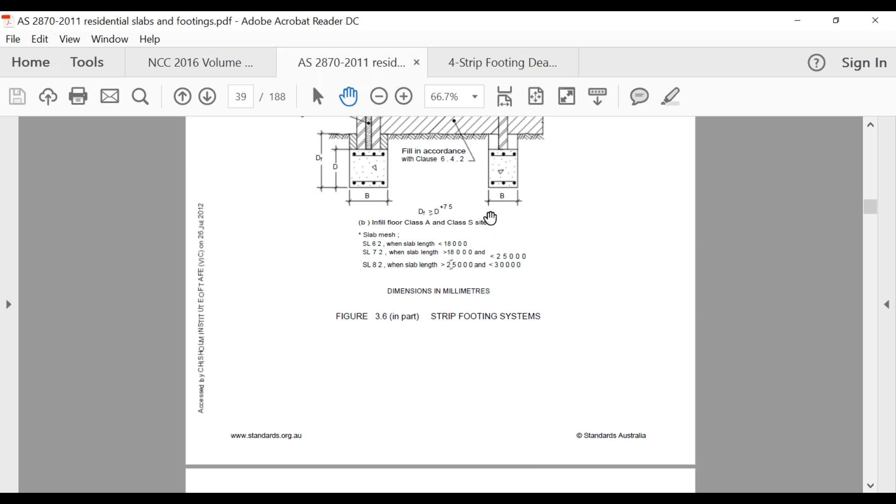So when we go to our Australian standards, when I was saying just try and read on a little bit further, it talks about it just down here. So in strip footings, it says where footings are wider than the specified width, an extra bar of the same size is required top and bottom for each 100 millimeters. So because we've gone basically 100 millimeters bigger, depending on which scenario you did, you chuck on a bar for every 100 millimeters that you've gone bigger. So we just put an extra bar in there because we only went 100 mil wider.

So then, is there an alternative trench mesh to 3N16? So let's have a look down here. I can't see any 3N16 there. So, no, correct me if I'm wrong. I hadn't had that one previously filled out, so sorry guys, but I'm pretty sure I can't see a 3N16 there.

So then the builder wants to do basically a garage detail. Can he use an infill slab? So when we read back here, guys, same thing, just a matter of reading through, it talks about infill floors. And basically infill floors should only be used for Class A and Class S sites. And so because this isn't a Class A or a Class S, then no, we can't.

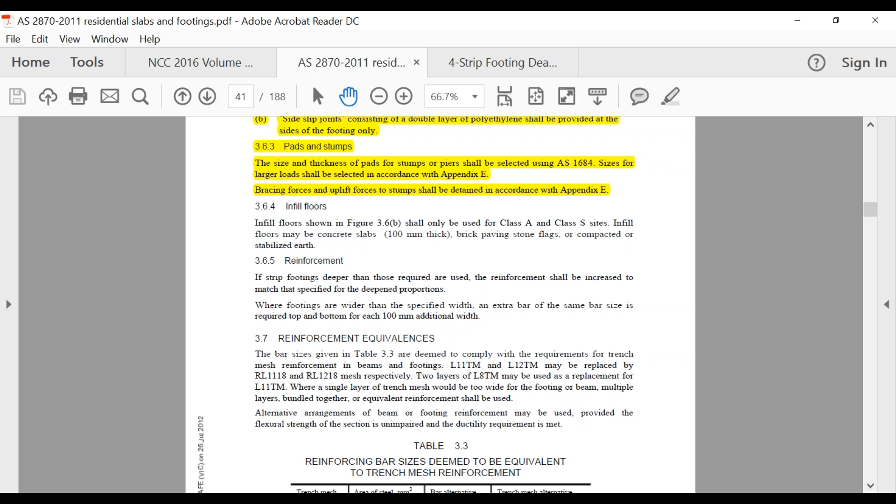And then it says give the height of the DF. Sorry, I must have given that before for one of the other answers, did I? Oh, I did that. Sorry. The DF was a 75. I missed the pad footing. Sorry, guys, I misunderstood that, I just read the wrong answer. So this one here, what is the depth of the pad footing? If I come back to my Australian standards, our pad footing was this one in here. Sorry, I was getting mixed up with my DF.

So the depth of our pad footing is the DS, and that's when we come here. It might have been the same measurement anyway, was it? So if you're using a H1, it's 1 meter, and if you were on the Class M, it would have been 500. So sorry, I got those around the wrong way, but I'm sure it makes sense now. So basically the DF was the outside one, so that was the depth of footing plus 75. And then the DS was this one here for our pad footing, in this column down here. So it would have been 500 or 1 meter.

And then if we were going to draw this in, guys, it's actually just going to look exactly the same. I'll just shrink that marginally. Hopefully it lets me. So when we draw in our footings around here, it should look exactly the same as that, because from what we read previously, it's 6 meters maximum, and they've got to go all the way through like that. So when Steve designed this, he's done it so the figures actually work out so it can be exactly in there. And I said exactly a lot of times then.

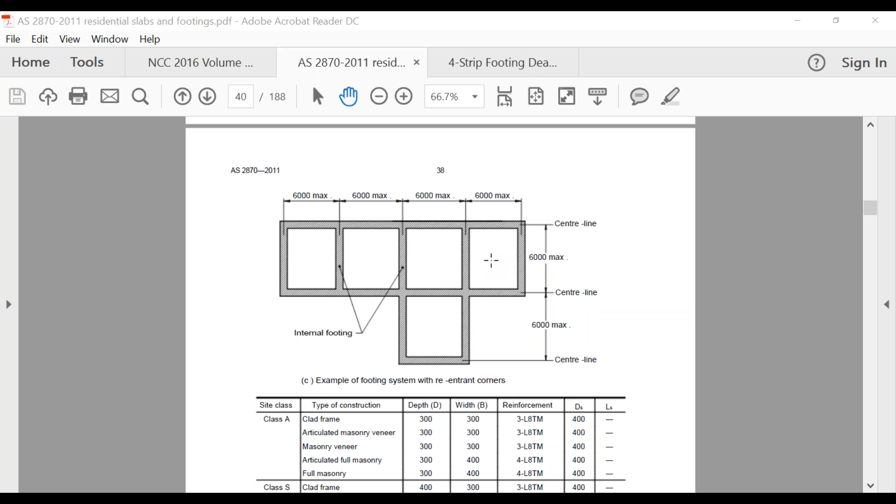So what it is, it's center to center. So just like next week, when we're doing bearers and joists, when we're talking about spacing, it is from center to center. So that's why if you look at that measurement, we worked out how wide our strip footing had to be on this one here. That's why it should work out exactly. We should have it looking like that there. So hopefully for the guys who needed a little bit of assistance with that, that helped out.

And what we'll do is I'll get some of these drawn up on CAD. If I can't get them done up on CAD, I'll just hand draw them and I can send them over and you guys can do some practice ones on it. Because this is probably one of the ones I find, this week and next week, the hardest to do online, just because you guys can't show me and say, hey Adam, am I on the right track here? So by all means, I'm one of those people who thinks practice makes perfect. I'll get Steve to draw some up on CAD, and if not, I'll hand draw them, and we'll send them over and you guys can do a little practice on them if you like.

All right, so from there, guys, what I thought we would do, and bear with me 1 second, I'll just bring it up.

Is these questions here. So you guys who have done this unit before have probably already completed these. So, they're not going to be any different, so there'd be really no reason to do them again.

But before we tackle these, what I'd like to do is just go through my Australian standard with you and make sure that you guys have got this stuff tabbed and highlighted, because a lot of it's going to be in this section here. And I normally do it afterwards, so when you do it, you can sort of try and find the answers yourselves. But I'm aware that some of you guys have probably done this before, and you're probably going to log off once I set the guys a task to do this.

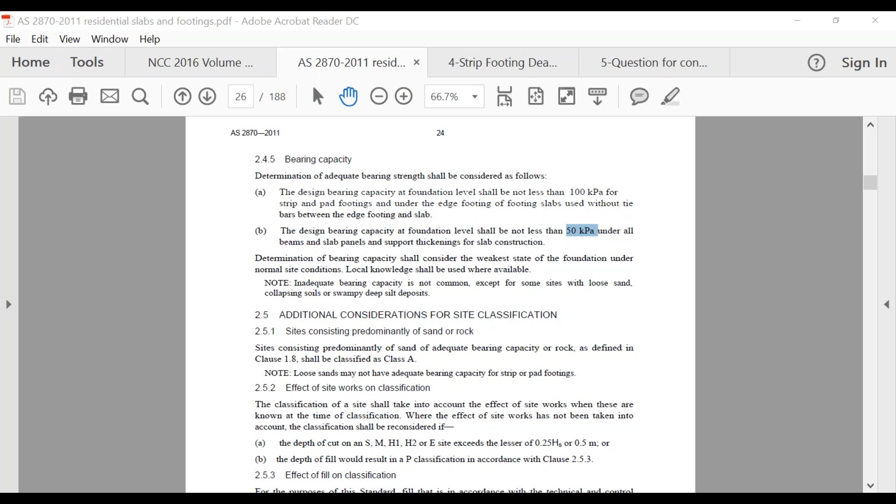All right, so then, we did do this one before. We'll bring it up again now. So basically on page 29, I've just got it there as my stiffened raft section. So I've just got a tab there that says stiffened raft and pretty much just highlighted this stuff here where it talks about our beam layouts and the different clauses that actually relate to our stiffened raft. And from there, you can't really go too wrong. It's just a matter then of referencing these drawings and then referencing that table.

Then the next one I've got is in the waffle rafts, and that's on page 33. So I've just got a tab there that just says waffle rafts, and basically just that part there. I haven't highlighted mine because there's not much to the waffle rafts. I just know that once I go there, I'm going to find it. So if you want to highlight that stuff there, go for it. But yeah, I've got waffle rafts tabbed.

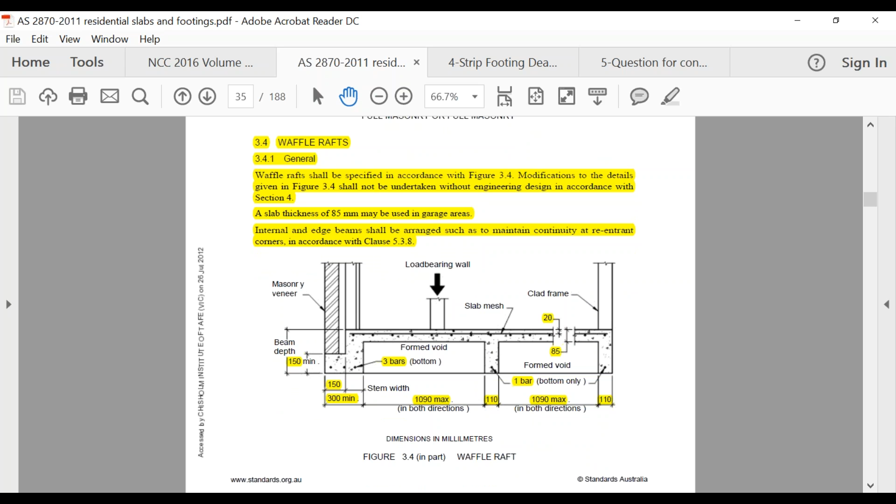And then, as we spoke about at the beginning of the presentation, I've just got strip footings, so that I can go to strip footings pretty quickly if I'm given a strip footing exercise. I'm sorry, I've gone past where it starts. So strip footing starts just here. So in my book, it's page number 36 on the bottom. And just a couple little things, like these ones here, I've got highlighted in mine.

And then also what the definitions were, so I didn't actually have to go back to that symbol book. So I've just got written there what the DF was. Well, the D is pretty simple, but then how the DS is in relation to our pad footing. So whether you choose to do that or not, it's up to you.

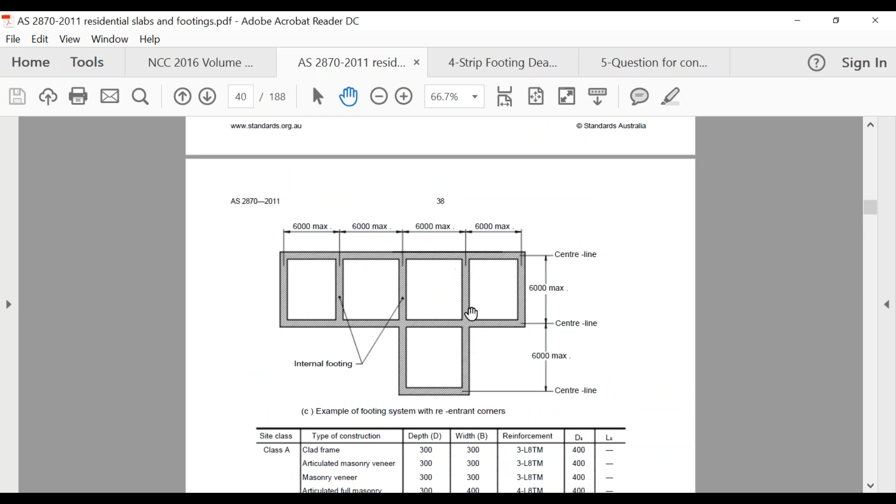And then the only other little part I've got highlighted in here is basically just that section there about our deep beams, because that then talks about 6000 centers and they've got to be continuous from the re-entrant corners through to the other side. So that's basically these ones here, showing you that's a re-entrant corner, so it's got to go through to the other side that way and then through to the other side that way.

And so if you wanted to, on page number 49, I did show you this before in the building code, but if you're someone who likes to use your standard rather than your building code... I don't know why these pages are blank on mine. Hopefully it comes up.

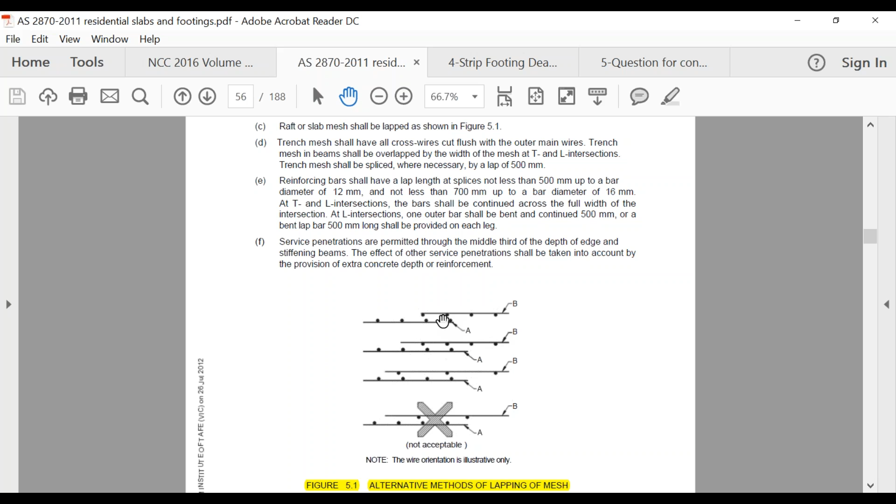So it starts to talk about our vapor barriers. So that's probably one thing there too. If you're not too sure, guys, how the mesh actually has to be lapped and so on, that's basically showing you there how they interlock with our wires. So you might know that, but if not, there's a good illustration of it, and that talks about the illustration, the methods of basically lapping our mesh, and then about our vapor barriers.

So this is where, if you want any information on vapor barriers, we'll talk about it down here. And then down the very bottom, it starts to show what we saw before in our building code, where basically what the thickness is and how they've got to be no less than 200 millimeters on the lapping. So I've just got that there with the tab that says vapor barriers.

And then I did show you before also the edge rebates in the building code, but if you wanted to find it in here, there it shows us a picture of our edge rebate. Me personally, I've never done one that little, but it does give us a visual picture of what we had in the building code before, where our edge rebate can't be any less than 20 millimeters.

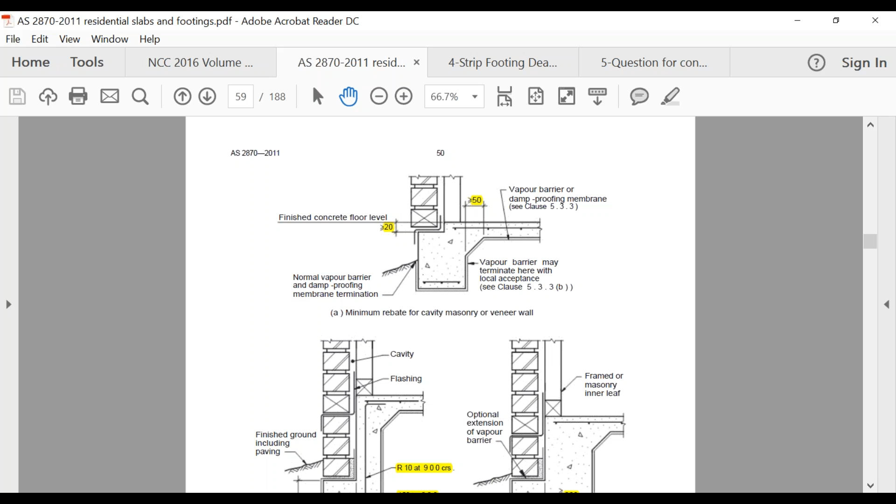And then the only other part that I then have is when we're talking about our beam continuity, and that's referenced previously to take us to 5.3.8. So I've just got it there, beam continuity, and that's in our rafts. And then when we come down a little bit more, there's a little bit more here about it as well. And I think that's all I've got.

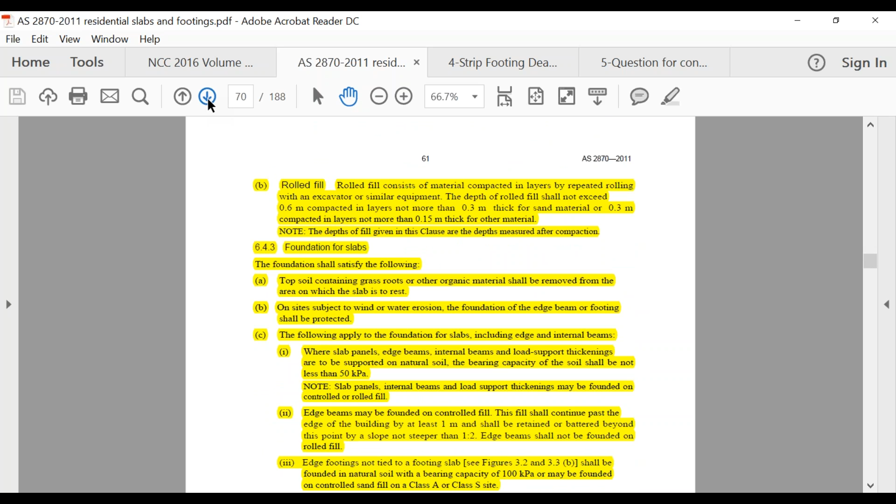One other thing I'll just show you, it'll be in the questions you're doing tonight. I doubt you're going to get it in your multiple choice when you go in there. I haven't heard of anyone who's actually been asked this, but I'll just show you where it is because it's a little bit hard to find. On page number 71, it starts to talk about our foundation performance and maintenance, and a bit to do with trees and so on. It talks about how far away trees need to be planted from different types of slabs, and then also what we need to do with our garden beds.

Oh, I might have gone one too far, did I? Now this next page here. Oh, they're funny looking symbols. It doesn't turn out very well. So that's basically that part there. It talks about your limitations on your gardens. You'll find that tonight when you do your exercise. The last couple of questions are something about garden beds and where they should go, and then also about the restrictions on placing trees.

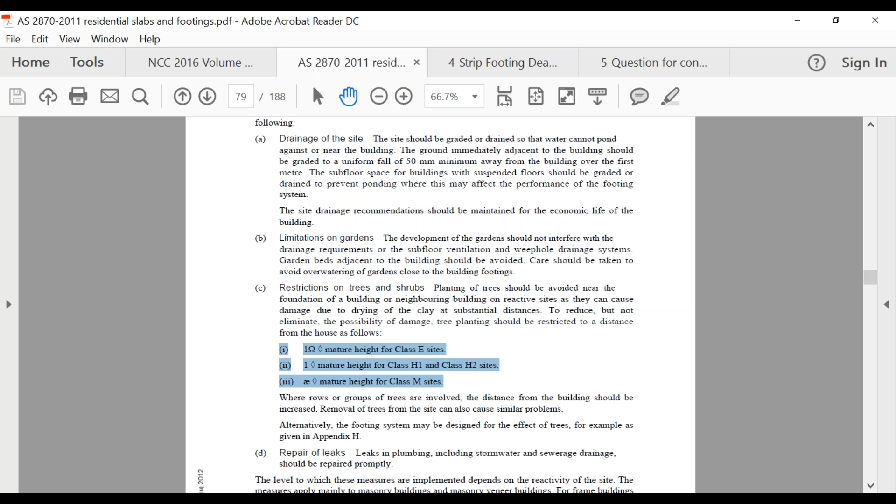I don't know what's going on with the symbol here on this PDF, but basically what that does say, if you're looking on page 71 in your own standard, it's 1.5 times mature height for Class E sites, and then 1 times the mature height for Class H1 and H2, and then 3/4 of the mature height for Class M sites. So that'll make a lot more sense once you open up your hard copy on page 79, and you'll find that answer will be for one of the questions you're going to do a little bit later on. So I know we're at 8:30, so let's go through and have a crack at these questions here.

A lot of these, the first couple, are probably pretty realistic to some of the stuff you're going to get in your testing. And there's a lot there too just to try and get you used to using that Australian standard, because obviously we can't be guaranteed that everything the VBA are going to ask you is in our curriculum. So we do exercises like this that are outside the normal scope to get you guys to use that standard and find answers if you're asked something we haven't trained you on. So have a crack at those ones there.

And I do actually have the answers for those, so I can email them over. I don't think you've got them in the back of your books, so I'll email those over tonight as well. That way, if you don't get them finished and you want to do it on the weekend or whatever, you can have the answers and see how you went. So I'll chill out here while you guys are doing that. If anyone's got any questions, by all means, just ask me or type them in the box. And next week, if you're logging off because you've already done that, we'll be going on to our subfloors.

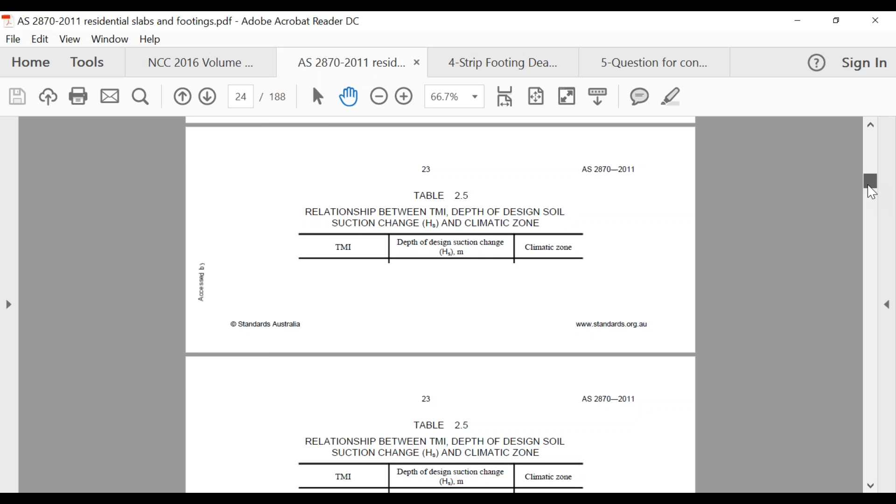Yeah, so when we look at that one there, when it's basically got the raft slab, let me just come back up to it. So when we're dealing with a raft slab, you'll see that it's always 300 millimeters. So that's what our raft slab always is. It's always going to be 300.

And the only reason it does change is when we read that definition a little bit later on. If someone digs it with a bigger bucket, then you've got to put an extra bar in for every 100 millimeters. But otherwise, mate, it's always 300 millimeters, and the depth just varies depending on what our cladding is in relation to what our soil classification is.

Yeah, no worries, Sue. What I'll do, Sue, I'll just email you over the whole standard, mate. Just going to start emailing over a few things, guys. I'll send over the answers for some of this stuff, and I'll forward that interview that the guy got as well.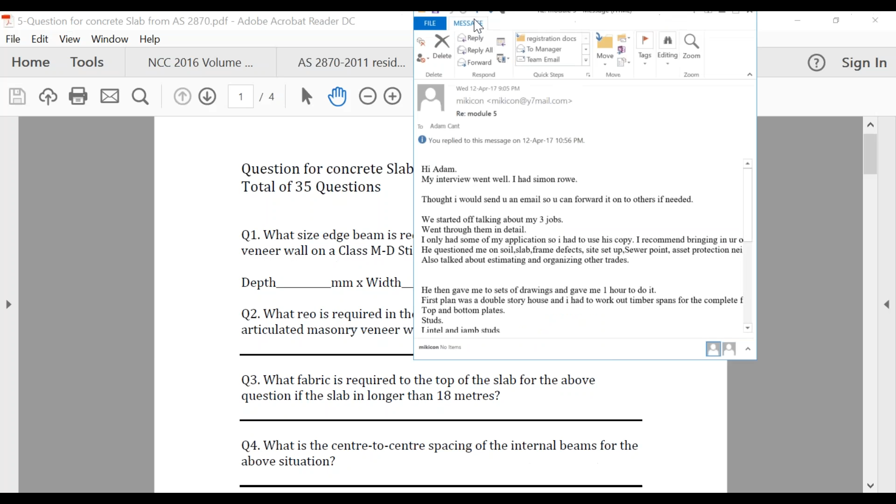Adam, yep, Subert here. I'm not talking about the exercise. I'm talking about the earlier document you showed us. Oh yeah, sorry, the beginning. Definitely, I'm emailing that one right now. So was this the one with all the different slabs in it? Not that one there, that's just something I'm trying to sort out. But the one I was going through earlier, I'm just in the process of attaching it and sending it now.

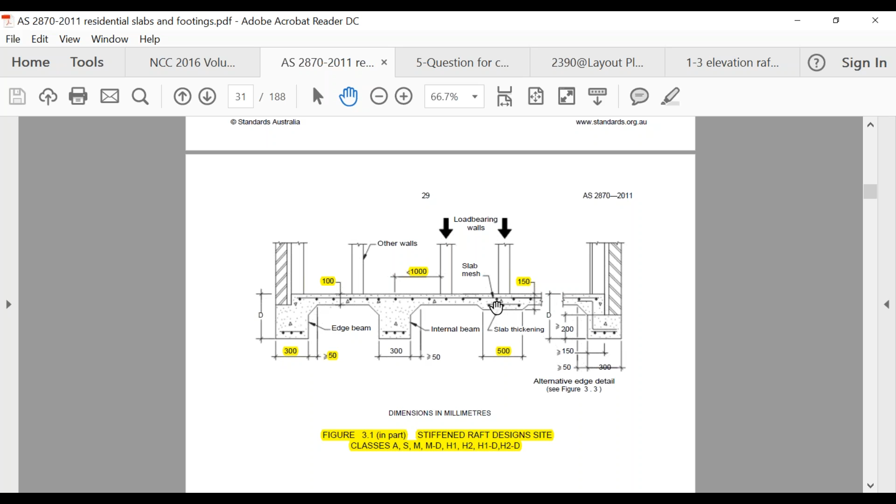And this other load-bearing wall is showing us that we can actually have a load-bearing wall within a metre of an internal beam, and then we don't need the slab thickening. So that's just showing you the two scenarios if we've got load-bearing walls. And the only stuff that... Sorry, what was that, mate? Is slab thickening always 50 millimeters? Yeah, exactly. In total it's 150 mil, so normally 100 mil, and then that 50 millimeters. You've got to remember this is the minimum requirement. Someone, to be safe, might make it 160, but as per the standard, it's got to be a minimum of 150.

Oh, okay. Yep. So the only things that change are the depth of the footing, and that's when we come over and use this table here, where you go, what's my site classification, and what type of construction am I using, and that'll give you the depth, and then the reinforcing as well. The table tells you that for the bottom reinforcing you can either use trench mesh, or the alternative is bars. The bars are just a round rod of steel, 6 meters long, and that one there would be 12 millimeters thick.

And some of them you'll need top reinforcing. Is 2N12 meaning 2 bars of 12 millimeter thickness? 12 millimeter. Yep. So when you have a look on here, there'll be somewhere where it talks about the different meshes; actually, that thing I sent you over tonight will give you what those different meshes mean.

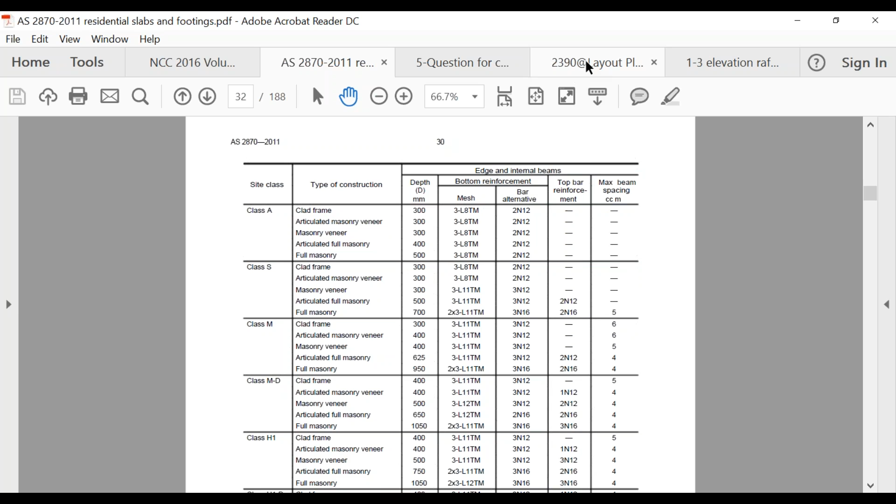And then this column was what we spoke about with our beam spacing. So let's see if I can, hang on a second, mate, let's see if I can bring up the answers. So this is not for this exercise, this is for a different one. But when we spoke about our beam spacing, which it shows us on there, to get that, we look down here. So just remember the first one's 4 meters in, and then after that it talks about after the first one in from the corner, what spacing can those beams be?

Okay, yeah. So after 4 meters, the board is 6 meters? Yeah, exactly. So I'll bring it down here, and just let me find the page that it's on. I sent a question about that as well. Sorry, what was that? I sent a question about that as well. Say if you're saying like 4 meters from the first one, and two sides, right? So say if it is a rectangular side, either that side or this side, where do you start, and how do you identify a way to start?

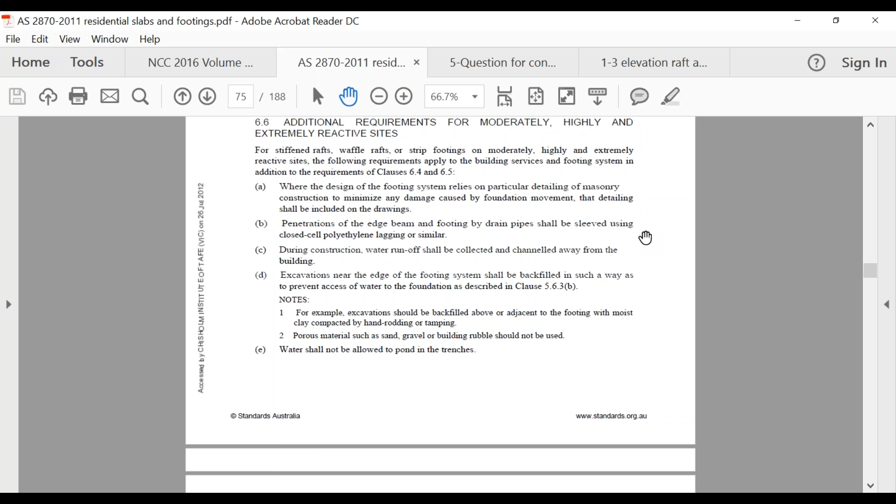Yeah, okay. So let me bring up this picture. Oh, hang on, it's not on any of those. I've got that many things open. It's so hard, I need about 5 screens. Oh, sorry. Here we go. Yeah, so basically what you would do, actually I'll show you the two to try and understand it a bit better. So when we look at our Australian standard, it's on page, I've gone too far, 59. 1 second, mate, let's get back there.

All right, so we're doing it here. If we read this, it says where the raft design includes internal beams, at all external corners, the maximum distance between the corner and the intersection of the first internal beam shall be 4 meters. So it's basically showing us we start from the outside. So if we were doing this other one here, I'll put the answers up so we can see it, let's make that fractionally smaller. So what you always do is come in your 4 meters.

I've done this a little bit differently because from reading a bit further on, we know that if there's an internal corner like that, it has to go all the way through. I've just made it in the middle because the distance from here to here is bigger than 4 meters, we've got to put one through the middle. So I've worded that wrongly. Because 5.8 meters is bigger than 4 meters, we've got to have a beam through here somewhere, but it can't be any more than 4 meters away. So they've just put it in the middle, because this one here has got to go all the way through.

But if those measurements were totally different, the first thing you would do is make sure the first one came in no further than 4 meters. So you just come in 4 meters from both sides, and it just turns out that they only need one in the middle. And you do that from all the corners, come in 4 meters to get that one, 4 meters to get that one, 4 meters to get that one, and then you would break up the rest of the measurements to either your 5 or your 6 meters or whatever it had to be. So you always come in 4 meters from the corners. On this one here, they've come in 4 meters and then gone 3.2 and then 4.

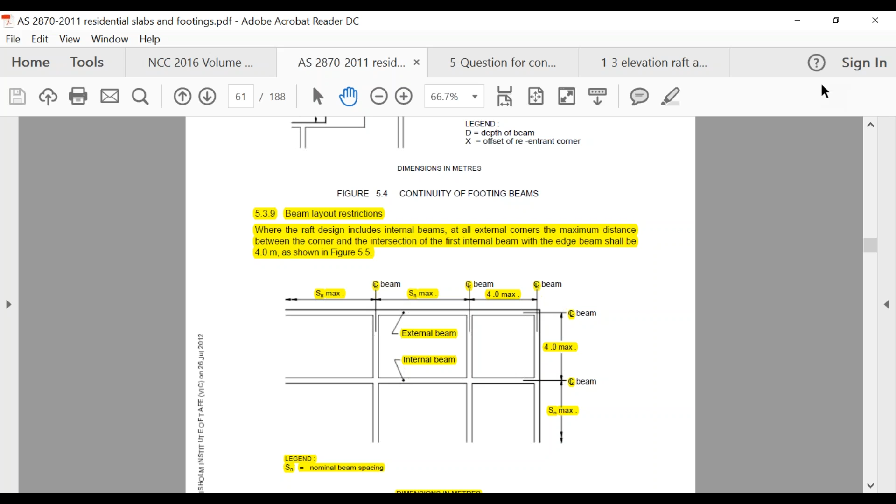It's hard when I can't actually, if I had a whiteboard here, I'd be able to draw it up for you. But yeah, if you can basically just follow these rules here. I got it. Do your 4 meters like that, and then you just basically work out the rest after that. Got it. Yeah, got it. All right, cool. I thought only one side, the start side, had to be the 4 meter, but actually all the corners got to be 4 meters. Exactly. Yeah, so in every direction from the corner, 4 meters. Yeah, so just like that.

Yeah, cool. And what I'll do, I'll send you over that one I've got the answers for. It's a little bit tougher. Oh, it's not tougher, just because the mathematics makes you think about it a bit more. But I'll somehow work out to get the answers out of there. I might even white it out and send you over a blank one and then send you the answer. So then you guys can have a go at it and then check it against the answers to see how it ended up. That'll be really good. Yeah, cool. It probably won't be until Thursday or Friday, but I'll definitely get it done before the weekend. Thanks a lot. Thanks, Adam.

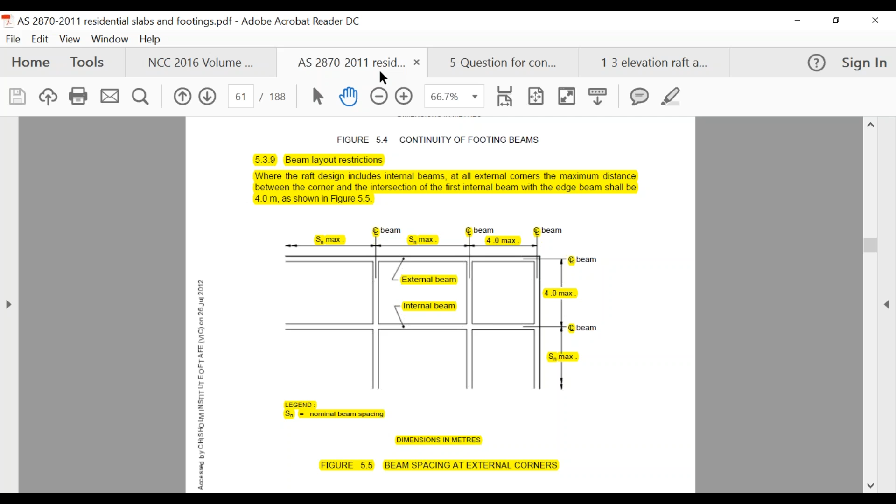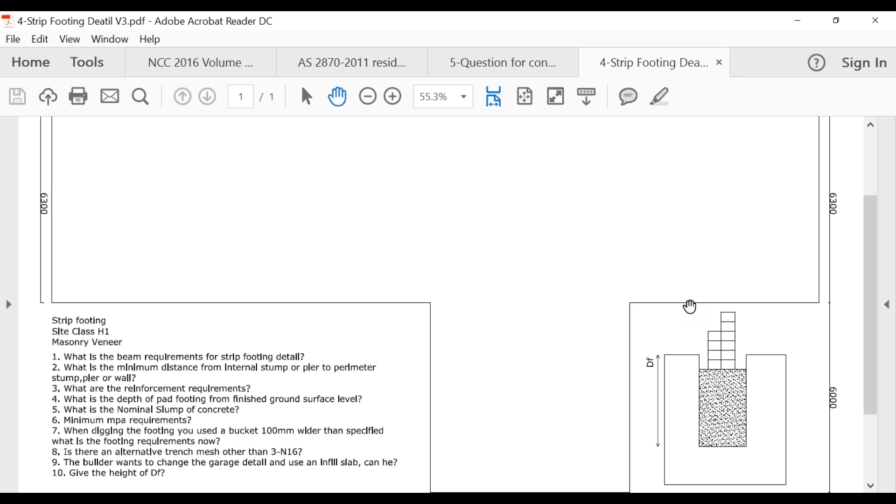So yeah, back with this other one, I'll show you the strip footing and we'll just cover that one. So this strip footing. And once you can understand one of them, Valavan, the others just follow pretty similar. Exactly. So this one's Australian, and if I bring up the Australian standard, what page is a strip footing on? Give me a second.

Page 37. So strip footing is really just the same. You come down, you basically get your soil classification, and basically what's the depth, what's the width, and what's my reinforcing. So the only thing that changes a little bit is then with these internals, what have you got in there? Have you got your pad, or have you got your stump, or whatever it's going to be. So that's how it varies a little bit,

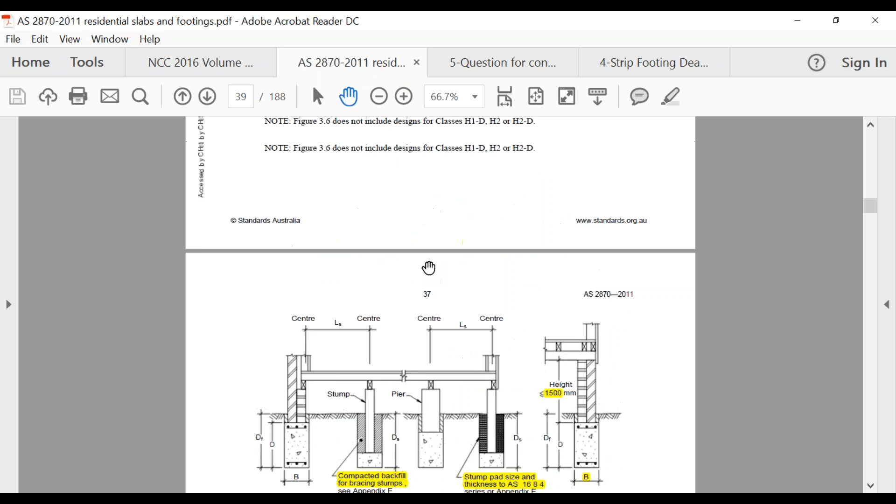but it's really just getting the information out of that table. And when we draw these up, it gives us that they're 6 meters maximums, and they've got to go through from one side to the other, and that's described in here when we're talking about deep beams. Sorry, I've gone past it. Must be on this part here. So you'll read through there, and that'll tell you they can't be any more than 600 centers, and they've got to go from one side to the other. Yep, got it.

The only thing I'm confused about is the measurement of DF versus DS. Yeah, okay, I explained that badly before. So DF is your external, so it's more than likely going to have an external load-bearing wall on it. You can see how much concrete is in there. So it's for your strip footing, where the brickwork sits on, whereas your DS is if you've got a stump in there. It's the stump pad size, so basically the hole in the ground that we put our stump in.

So that's why it's different, and we'll cover this in our next session. To be honest with you, whenever I've done this, we've always put the concrete to the top anyway. But if you read the Australian standards, you've only got to put about 200 or 300 millimeters of concrete in there, but you've still got to have it deep enough with the soil around it. So the DS is if you've got a stump in there, it's going to be a different sized hole to if you've got an actual footing with reinforcing in it.

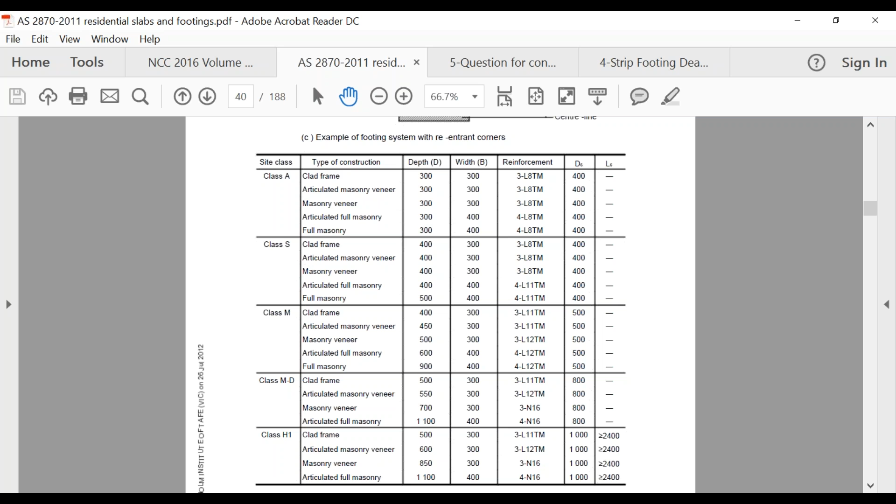So this column here is for the depth of where your stump's going to be, and this one here is the actual depth of the external footing, where that brickwork's going to be sitting on. Yep, that makes sense. And it is confusing. Whilst I understood it, the first time I trained it, I struggled to think, how am I going to teach this to guys?

And you can see here too that the reason why it's probably going to be less is because of the cladding on it, because it actually doesn't have brickwork. It's probably just going to have some weatherboard or something down the outside. Whereas this one here has got those 2 rows of brickwork on it. Brickwork on it, yeah.